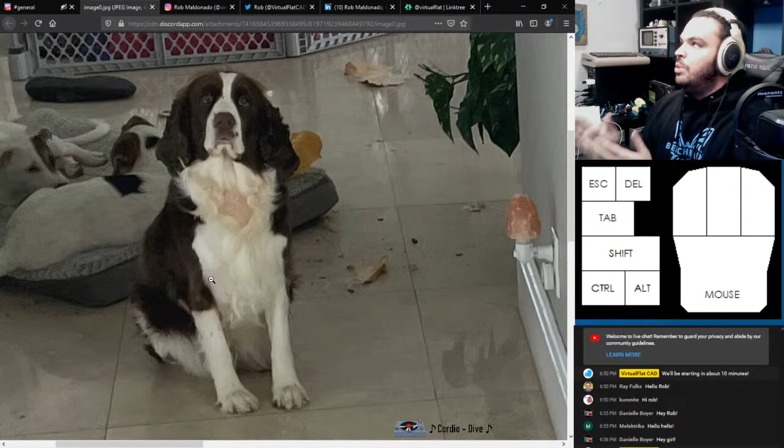But I walk out of my office and I see this. So the door was ajar, just like you saw there. And immediately, I see Stella, and look at Stella, she's looking at me like this. So immediately when you see a dog looking at you like this, sitting, there's something wrong already.

So Stella just with the face of, please, I tried to stop them but I couldn't, tried to, I guess she tried to talk the other puppies out of making that huge mess over there, but failed.

So apparently what happened is the puppies were outside. They broke in somehow, not really sure how that happened, maybe the door was just ajar or something like that. But these little puppies, I tell you, they brought in a pine cone, they brought in this pine cone and just demolished it.

So I just walk out of my office and I already have this little mess to clean up. But normally not much too much happens for these puppies, they just like to chill and do whatever. But some days you get the cute puppies, and other days you get the pine cone, and the pine cone crumbles.

So that was my little story over here, hope you enjoyed that. But other than that, what I got going on for you here, let's look up. So kind of related to the puppies is today's model of the day. Hey Yashwanth, what's going on?

So today's model of the day is this pet grooming table. The point of it being, you lower down the table to a height where your dog or whatever animal - if you have a cougar, sure, why not - can jump on the top of this, and there's a switch that actuates a linear actuator, which raises the height of this table.

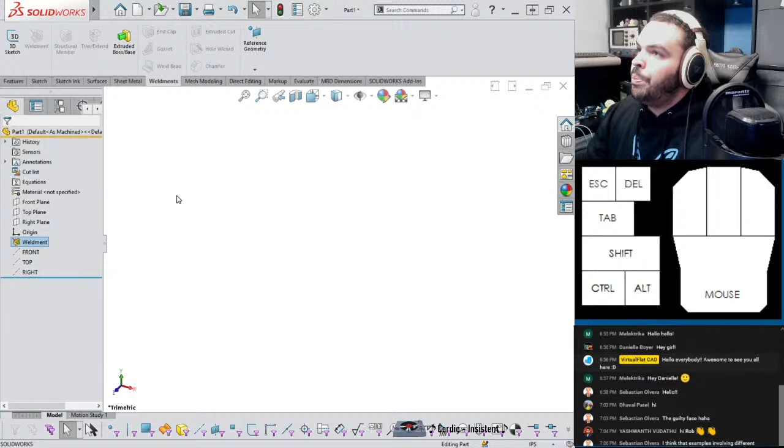All right, so let's see, do I do my profiles first or my layout? Let's do our layout first, because then I can demonstrate another thing.

So with my base, you can of course draw this thing with all the rectangles, the curves, the fillets and stuff like that. But boiled down, as simple as it goes, you're just drawing these overall paths for these weldments to go along. That's part of what makes working in the weldment package so simple.

So maybe we'll start like this, and like that. I'm gonna have to lock this sketch down, but overall this is our shape. If I go ahead and compare it to this doodad, yeah, it's like an H with 2 bars. So that's what we've got here.

Now I can begin defining my sketch just like I would any other. That's always the same. You did not attach to the things. Let's snap like that. Okay.

So this and this would like to be horizontal. Alright, so now we have something that moves like that.

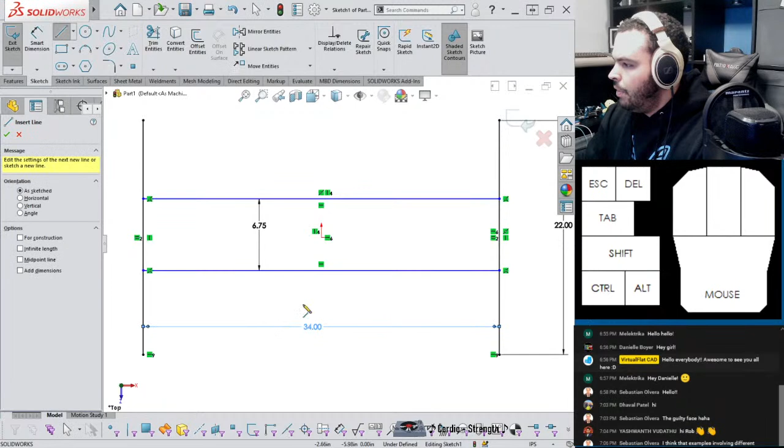So likewise, this gets 6 3/4. We're still underdefined, but I think I can take care of this with perhaps a center line.

Like that. And now what? Oh yeah, the midpoint of this and the origin need to be in the same place. Alright, so now we have our sketch fully defined.

Before I go any further, I will of course save. Saving is very important. It's always good to build up that habit, but it's also when SOLIDWORKS starts acting weird—it's almost like how a sailor just knows there's a storm coming. A CAD modeler just knows when SOLIDWORKS is starting to become unstable by how it's acting. It's not doing anything now, but this is just out of good habit.

This is a grooming table. Grooming table. And I'll just name it something simple. Groom base. There we go.

In regular modeling, you draw your sketches out and then go to your boss extrude or maybe your revolve. But in weldments, we have this main feature called structural members. Let me show you how it works.

Once you get a layout sketch here, the idea is that there are only so many off-the-shelf weldment profiles you can buy, right? You don't want to go out of your way to have some weird box shape. It's usually something very common, at least in the United States—1 inch by 1 inch, 1 inch by 2 inch, 2 inch by 3 inch.

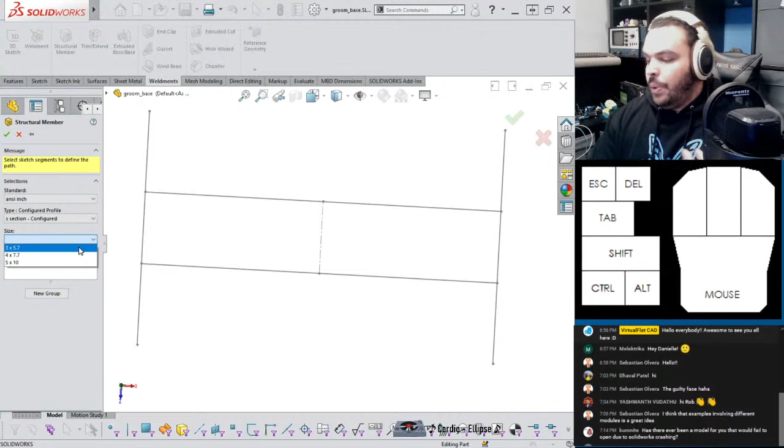Yeah, everyone has had that experience. I think that's especially true if you've been using SolidWorks for any period of time—it just happens eventually. Especially, I think the most unstable versions of SolidWorks actually happened pretty recently. In my opinion, when I was working in tech support, 2017 had a lot of bugs, 2016 had a lot of bugs, 2018 had bugs. And then they started to get focused and were like, oh, maybe we should add less features and work on stability and fixing bugs. And we were like, yes, they get it finally. So I think 2020 is very stable in my opinion. Not to say I've never had crashes on it, but the most recent versions of SolidWorks have been the stablest I've ever seen them. I've been using it since 2015. But yeah.

So I don't really see the profile I need. So let's go make a custom folder. First thing we need to know is where our file locations are. What you want to do is go to your options, go to where your file locations are. Here it is. And if we go here, there's actually places where you can show these are the folders that contain your weldment profiles.

No need to be sorry, kuronite. I take any question, and if it's quick to answer, I'll do that. But that's a deep rabbit hole, so it is what it is. So yeah, that is the standard location for my weldments profiles.

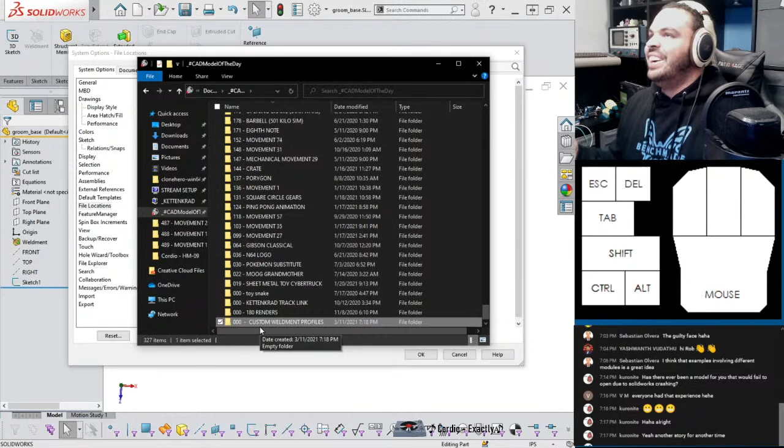2020 is very stable, Rob 2021. Yeah, and that should pop up with the crash reporter, where it says 'oh SolidWorks crashed, you want to send a report?' It should just have a picture of my face with that quote. Oh man, I'm sure that'll go over well to the people experiencing that.

All right, so we have our folder. Once we get that, we'll go ahead. I copied my file path and I just say add. I need to paste. Okay, so we're in the weldments profile folder there. So that's added, so I should hit OK. Would you like to make the following changes? Add this? Yes, that's why I did it. So let's go ahead and do that. Go back to structural member, and that's interesting, I kind of expected it to show up over here.

Let me go look at it for a second. So we do have all of these, right? Weldment profiles. Here, I will troubleshoot this for like 5 minutes tops. Okay, so we don't need templates, it's the profiles. It could be I just need to restart SolidWorks, so let me try that. Here we go.

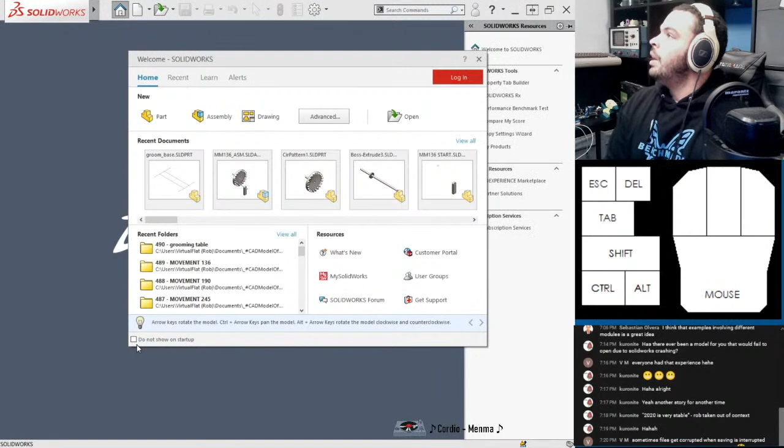VM chiming in: sometimes files get corrupted when saving is interrupted for some reason, happens more when working on a network. That's a great point, because the SolidWorks file structures are built pretty specifically. And of course, really with any file, if any part of it gets deleted, that causes stability problems a lot of the time. Honestly, when I worked on tech support, if a customer was getting tons of corrupt files, first question: are you working over a network? That is literally number one. And if that's the case, it's like, well, your connection is probably not stable. I wouldn't say it like that - better customer service ways to say that.

Okay, still not showing up. Why you do this? Why you do this? But yeah, that could be a very common source for corrupt files. Yeah, if this doesn't add, I'll probably just go to the SOLIDWORKS standard one and show you the other way of doing it, because I do want to get on with our lives here.

So let's see, I think the easiest way, honestly, I'm gonna grab Search Everything and type in ANSI inch. Okay, why is the search like this? Details. Okay, so this is probably the folder. All right, let's take a look at this. Actually, I'll talk a second about what I just did there. It's very helpful to have this Search Everything app, I highly recommend it, it's free and it's like Windows search if it actually worked. What I like to do a lot is just, if I need to find any system file for SOLIDWORKS, I just type in the name and it gives me the path. It's great. So yeah, angle iron, C channel.

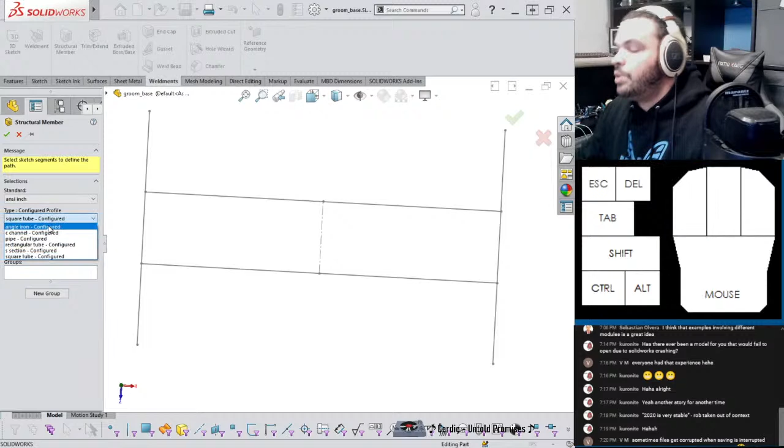So all of these were what appeared here. So angle iron is the first one. That's where it is. And now what we can go ahead and do, if I can find my folder - there we go.

Let's actually add a configuration to this rectangular tube. So you might be wondering, these aren't SOLIDWORKS parts, because a SOLIDWORKS part is SLDPRT, this one is SLDLFP. That is a library feature part, used by SOLIDWORKS for library features that you kind of drag and drop whenever you need. But you can edit these. So in order to do that, let me just minimize this - simplest way, drag and drop straight into SOLIDWORKS, and that will bring up the standard SOLIDWORKS library part for editing, and it's great.

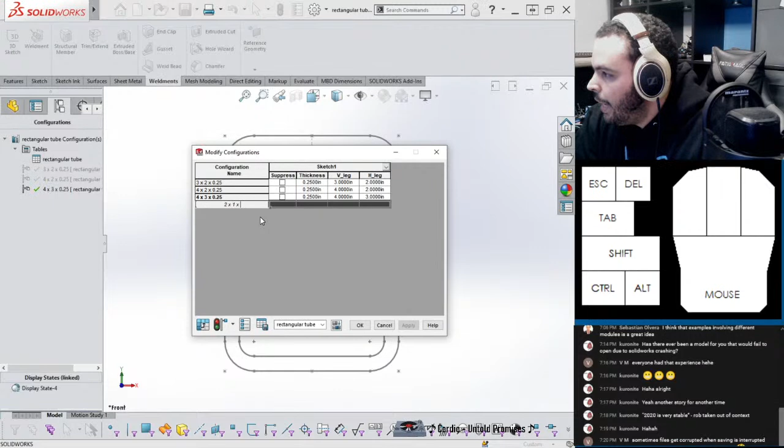So you can see here, configurations is actually what drives this whole thing. There's a table here - what's in new? So the table, if I double click, it should tell me its secrets. Okay, I think I'll do this from here. So I can go here and say, oh, this is great actually - it looks like it's the big dimension followed by the small. So this is a 2 by, to be consistent, by 1 by, and it's not going to be a quarter of an inch, like Christ, that's way too much - it's going to be a 1/16. And then I can just go here. Yeah, spill your secrets for me, little table.

So the V leg is 2, and the H leg is 1. Apply. Okay, so if I click on this, this should adjust.

Do you have to rebuild? No, oh no. Zero thickness geometry. Oh, this is probably too thick. There we go.

Yeah, let's do that. So what was happening there is that the values I put here, the fillet was way too big, so this line turned into 0 length, and that's why it was throwing a fit. So let's...

I might throw this in a different folder. You can live in there, and then I'll just drag and drop because of permissions. But let me give this a test before I do that.

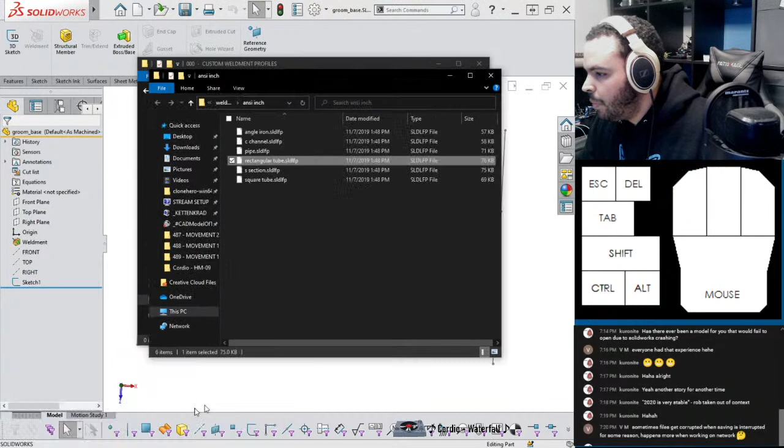And so one goes here, and I need to go back into my... this. So replace. Admin privileges - ooh scary, so scary you guys.

Alright, so what do we got here? ANSI inch, rectangular tube, and there's our new standard. So there's a 2x1. Alright, and now we get to see some actual solid geometry now.

Hooray. So the way you want to pick groups is by what SOLIDWORKS calls trim order. As you can imagine, these tubes have thickness to them, so you can't have a tube go all the way to the length of this and this because they intersect each other at this point. So the question is, who gets the spot?

The things you pick first get higher trim order, so higher priority. So the trim order of our thing here, if I go back to this doodad - yeah, you see at that corner, the weldments on the side get priority. The ones in the middle have secondary priority, so I should pick these ones first.

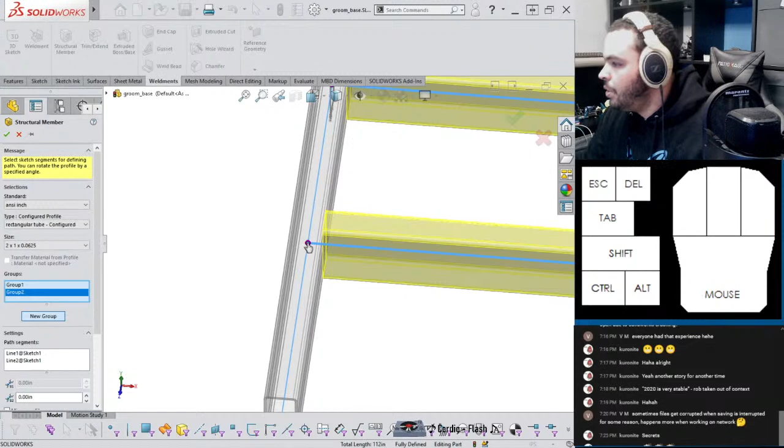You can adjust this on the go too. If you click the pink dot, you can adjust what happens to the corner treatment. It says group 1, trim order 1. If I set this to trim order 2, and this to 1, you can see the horizontal member has priority - it gets the pink dot, and it just breaks this thing into 2.

So it's really pretty powerful if you plan ahead of time. If you plan ahead of time, it works out pretty well.

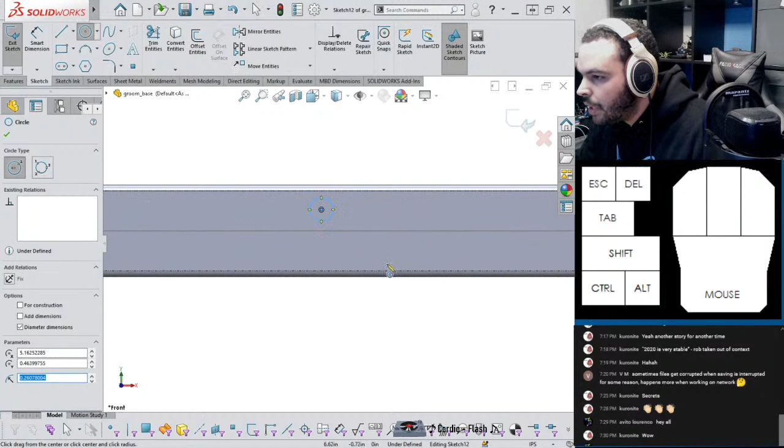Currently stuck on cut lists. Oh, we can totally review that, man. Yeah, they can be kind of tricky sometimes.

It says 0.75, and that measurement is to this edge - that's how I measured it. And that is 20.5, and that should fully define it. Then I could just say extrude cut through all both ways. So regular features still work on a weldment part.

And I think that'll be it for this - I'm not going to go too crazy because I've already spent a little bit of time talking about weldment profiles. Oh, Sebastian asked an awesome question, and this I can demonstrate.

How do you change the orientation of the structures? He's talking about - correct me if I misunderstood - these just kind of knew they were vertical, right? So what if you want them horizontal? I'll tell you what you do: you go back into your weldment feature here, scroll down, and there's actually a box where you can specify a rotation. So if I set group 1 to be 90, and group 2 to also be 90, then hit OK, now they're flat. So that's how you do that.

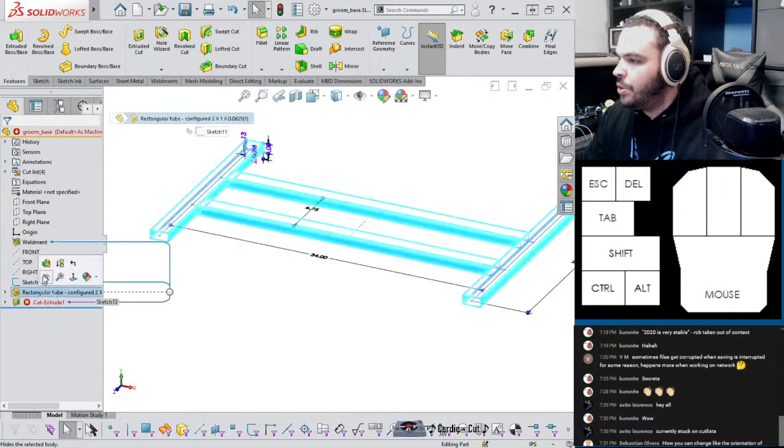And additionally, if you press locate profile, it'll zoom you into the profile. Remember how I said I like to draw the center lines of where the profile is going? Well, if this was like the top corner, you can just click here and it scoots up to the top corner just like that.

There's a lot of nuance you can have with your weldments here. Let me put these back. So 0, group 2, 0. Cut extrude should come back here, and we should be all good.

Vito, how would you say is the best way to keep in touch with all the elements of SolidWorks? I feel like I go through cycles in terms of proficiency. Surfacing is alien stuff to me.

I always say the best way is practice. I've said that tons of times, but honestly what you're doing right now is really going to be good for you. I also like this particular thing to model today to keep my skills sharp, because it's kind of the opposite for me where I really like to do everything with surfacing, but weldments and sheet metal don't get a lot of attention from me typically.

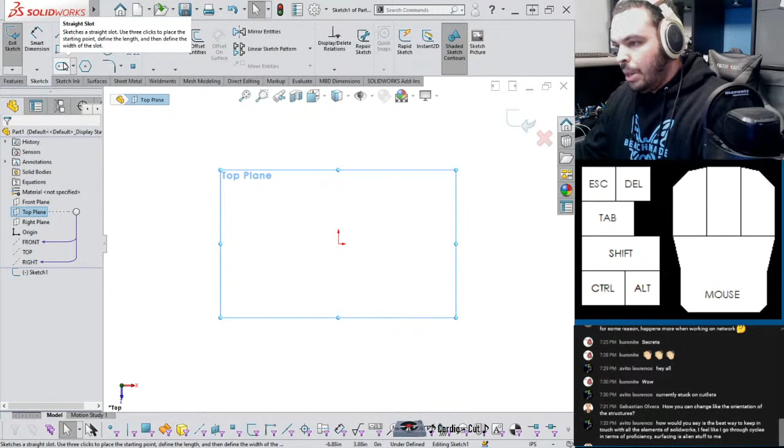All right, so this is pretty good. We need a new part now. So I'm doing bottom-up assembly modeling, and I think I'll do this with sheet metal. So I'm going to grab the top plane, and this sheet metal box will probably have... yeah, it's like a... I don't know if you can see that.

Here, let me change my little scene there. It's a sheet metal box. It has some features on it. And there's my very, very crummy drawing. So it's like a box with three of the sides missing.

So what I'm going to do, make sure I change it back. There we go. Let's get a center rectangle like this, and then just turn this into construction. Boom, there you go, that's the shape. Don't forget, you have tons of sketch entities, and a lot of them are very close to what you need, so be sure not to count them out. Like I could have drawn these three lines one at a time, but this basically had it for me.

All right, so that wants to be 6. Eventually this will get another configuration, but I'll worry about that when the time comes. 7.75, we go to sheet metal. So here's where the fun begins. Base flange or tab, so sheet metal, and the main thing there is base flange.

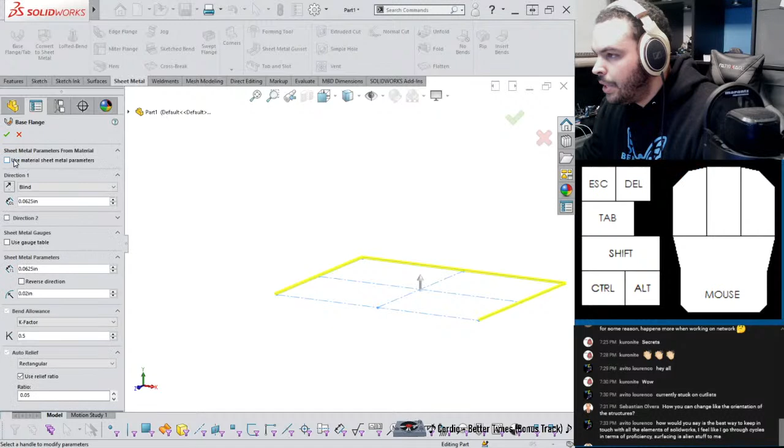So what I'll do here, you can set the thickness, but let's see. Oh yeah, I don't have a material applied. Use gauge table, that's what I was looking for. SolidWorks comes with a bunch of gauge tables. Let's use the sample table for steel, because that thing is pretty rusty, so I'm very sure it is steel.

Vito, what do you got? When the time for assembly comes, maybe touch on how to use the new part option from within assembly. I find it hard to navigate to get my plane and setting the origin, and end up just making it normally. Oh, I'm glad you brought that up, because now I can actually show you how to do that when we make one of these last parts here. So I'll do that later.

Awesome suggestion though. The overall height of this is 14. So there's our sheet metal thingy. Okay, and in this, there is a boss that supports the axle that goes through.

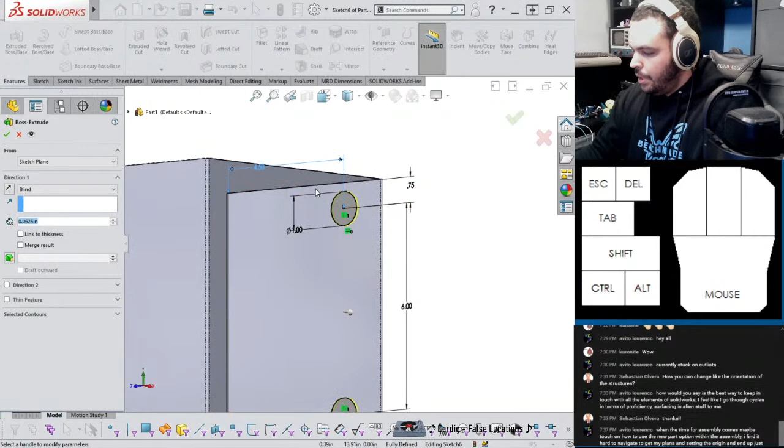So I can not merge. Oh, I didn't measure their thickness, but I'm just going to guess they're 1/2 inch. Okay, so we'll get that mirror. Okay.

So far, so good. And now, I think I'm going to borrow these same sketches. Let's get on the right plane here. Oops, can you... oh, alright. Yeah, I think that's a bug.

Stable version, guys. Yeah, because that's happened to me like in every single stream when I try and put a circle on a center point.

Random question: when you're dimensioning something, the pop-up window where you enter the value is wider than usual. Is there any way to have it like that permanently? Honestly, that's a good question. Oh yeah, I didn't really even notice. I wonder if I put it shorter, just... It might just have memory, honestly.

Here, let's put it ridiculously long like that, and let's just see if it appears in the future parts that I model. Let's do that test, because the answer to that I'm not sure, but I think it has memory.

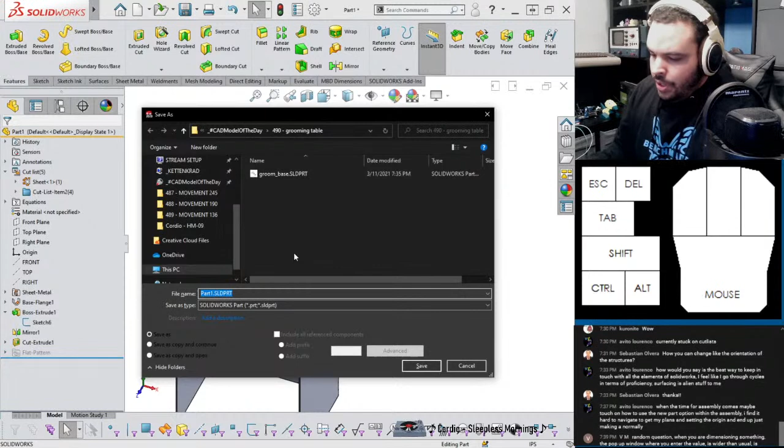Okay, so I'm just gonna call this groom box. And let's get, so let me rename this configuration. Go to properties. So this is the dimensions of the one that is at the towards the bottom. That is to say, it is this box here, and I'm probably gonna neglect this cut here. You know, it doesn't really add anything to the design.

But we'll add a new configuration called top, and I should be able to click this, double click that with our really long box, and the value of this is supposed to be 9, but be careful, don't hit that check just yet if you're doing configurations. Hold it, partner. You go over here and make sure you set the scope to just this configuration. This trips up tons of people. Now you hit OK, and it's always good to run a little test.

So bottom, nothing changed. Top, there we go. So you can see the top one is just a bit wider than the bottom. And that rebuilds just as expected. There we go. All right, onwards and upwards.

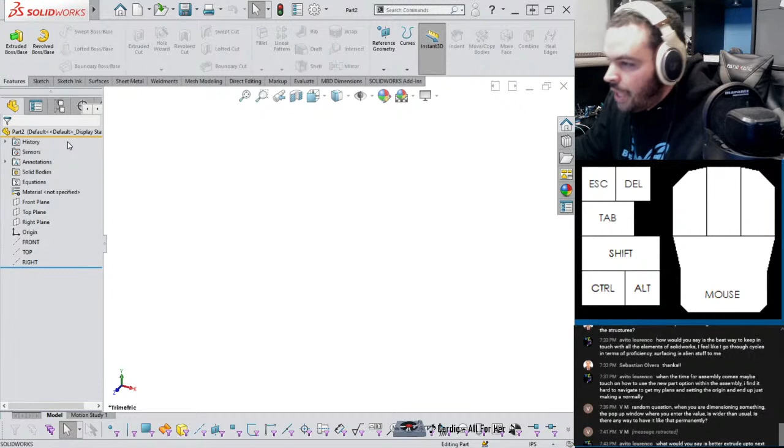Vito saying, what would you say is the better extrude option? Up to next versus up to surface? The end surface is the same. Pros and cons. That's another great question here. Let me see if I can try and work that into this next one here. Let me see, let me think. All right, how about I start modeling it, and then if I see a good opportunity, I will strike and answer your question.

So this next component is going to be the actual linkages. It's this. So this, just like the boxes, will have configurations because one of them, you know, you can see does not have a hole, has a recess, but no hole. And then this one has a through hole in which the linear actuator actually is able to put its linkage through. It's a plunger through, for lack of a better term. I know there's a word for it, but I literally can't think of it.

All right, I think I'll do this kind of similar to how I did the other one. So again, it is like a box with a couple of these removed, but they also have these little tabs, so I'll just draw these out like that. And it's okay to have lines on top of each other like that, as long as this one is a construction line and not like a solid line.

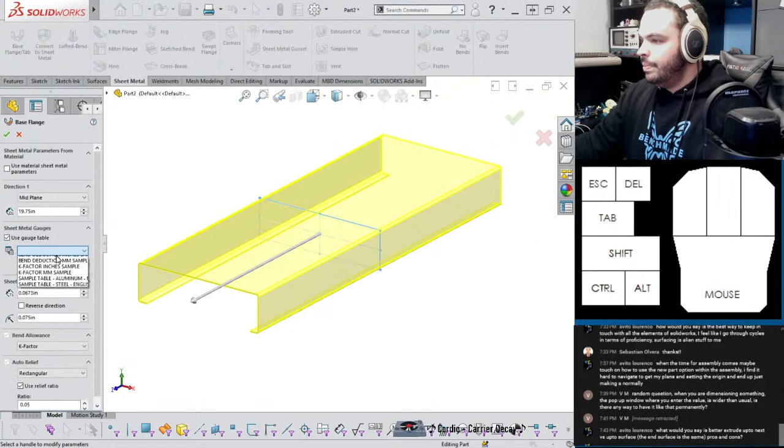Now we're getting somewhere. Again, it'll be a sheet metal part with an overall length of 19 3/4. We can use our gauge table, sample table, and we'll be consistent and say it is 15 gauge.

Also very cool about the sheet metal, notice that I can draw these with perfectly sharp corners, and it'll put the radii on there for you. Very cool, you can set the option for that, like here.

I might need a flange to box off the ends. Let's do this. Yeah, I'm gonna need an edge flange, so from here to here.

Let me see if I can, well, no, there's nothing. There's like end conditions for this feature too, but nothing particularly interesting. Okay.

I know I don't want to spend too much time on this, but can we have a relief, please? Can I see the relief? There we go.

Let's try that. I might have to trim, what's it called, trim side bends. That's the option that needs to be on. That should prevent this weirdness from happening. There we go, that's more like it.

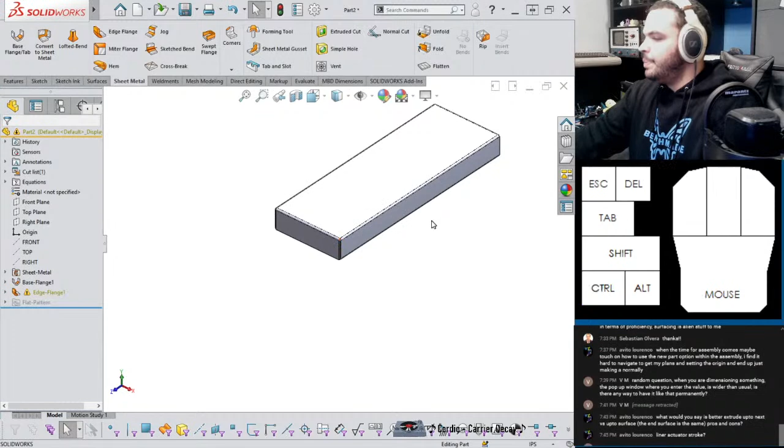So this will be Groom. Oh, that's all caps now. Deal with it. Groom link. Not trying to overthink it with the names, you know.

Okay, now I want the holes, and it has a, what is your problem? Part intersects itself after bend operations. Still? I'll try one more thing, but if it just keeps being angry, I'll probably just move on. Bend towards the outside. Okay, that fixed it.

All right, we made the part slightly longer, and that's totally cool with me, because the critical dimension is where the links actually, where the pins actually are, you know? So in this, we will have first some standoffs.

And drawing circles like a drunk man. Equal. Might even just connect them with a center line. Midpoint with the origin. And then the distance is 18. And this is the one that matters.

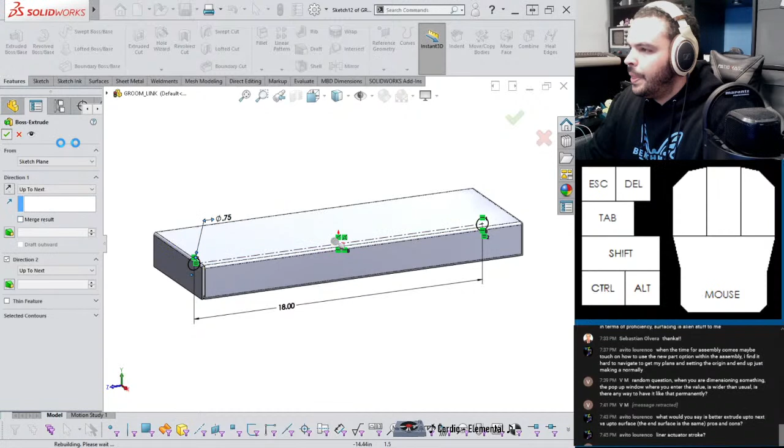And I'm thinking about that other question that I got, but I don't think this is still a great example, so I'll move on. I'll probably make up a quick example at the end.

Okay, and then we need the holes now. So, okay, so these circles are just fine. Equal, 0.5, and extrude cut through all, both.

And there's our link. So we need two variants of this. One of them, I'm going to call connected, because that's where the actuator connects to.

Yeah, ooh, not derived, I need to rename. Can I rename from here? No, properties. So I'm just going to call it connected, add. And then one is through hole.

Alright, so I'm going to do the through hole first because that's just one feature and I can just suppress that. Actually, yeah, this is a through hole configuration.

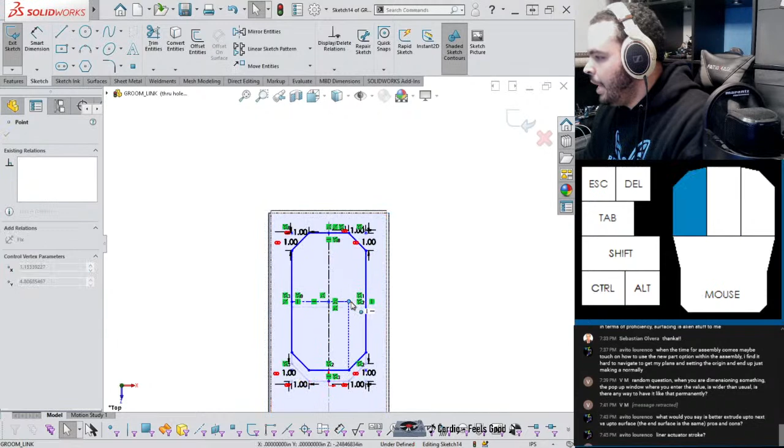Yeah, I thought I would just use sketch chamfers rather than feature chamfers just to make it so I don't have to select these tiny edges, you know. Alright, fine, be that way. It was your turn in the spotlight, sketch chamfer, but you're being annoying, so I had to cut you.

I'll just add them in the features, no biggie. 5.25. Okay.

So this too, oh, this is gonna be a little tough. Well, it's not too critical because this hole's gaping, so it's not like it's a tight fit or anything. So if I get it off by a thickness or something, it'll be fine. Extruded cut through all. You're going the wrong way, son.

Go the other way. I might be able to use the break corner. So if I go to sheet metal, go to corners, no, not corner relief, break corner. Can I break? I can't break internal corners, can I? No, I guess it's only external.

So if I click on this, you see it's breaking them with a chamfer. So I think I'm just gonna have to use a regular chamfer. All right, wait, I got a cool trick to show you guys.

Yeah, I'll show you something pretty cool here. And before I do that, let me answer Avito's question.

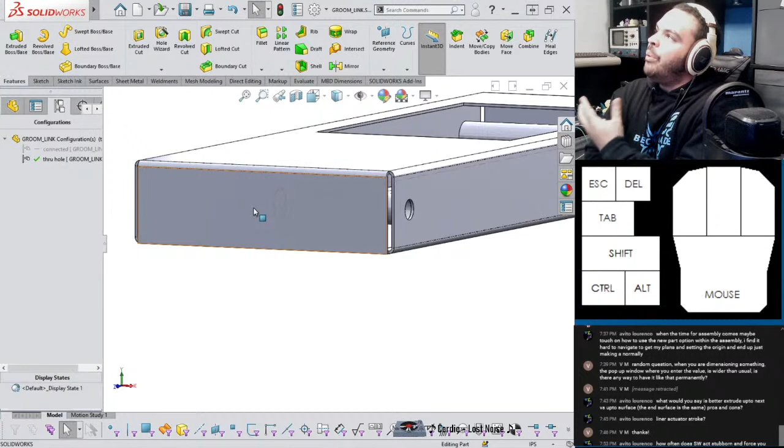How often does SolidWorks act stubborn and force you to school it by going an alternative route? I love that question. I would say practically every part. There's something like, there's a way I want to do it, and I have to just use the alternative route. Not necessarily a bad thing, because some of it's like, oh, instead of doing it in one step, it's two steps. So most of the time it's not a big deal. It's not like I hit a brick wall and I can't continue anymore. But I'd say almost every time.

Man. Sometimes I can't fault it because it's just such a huge and complex program.

All right, so back to my super cool tip that I bet you've never heard before. I want to add chamfers to this. I've decided, but well, not yet. If I go to chamfer, I have to go and painstakingly pick each one of them. Let me do that again, just to show you. If you click on it, it shows you the preview, and that's it.

Fillet, on the other hand, is a little different. So let me go to fillet instead. And if I click this one, you get this kind of super duper edge selector. It's awesome. Let me zoom out and show you what I mean, enough that I can still pick it, but then you see the effect.

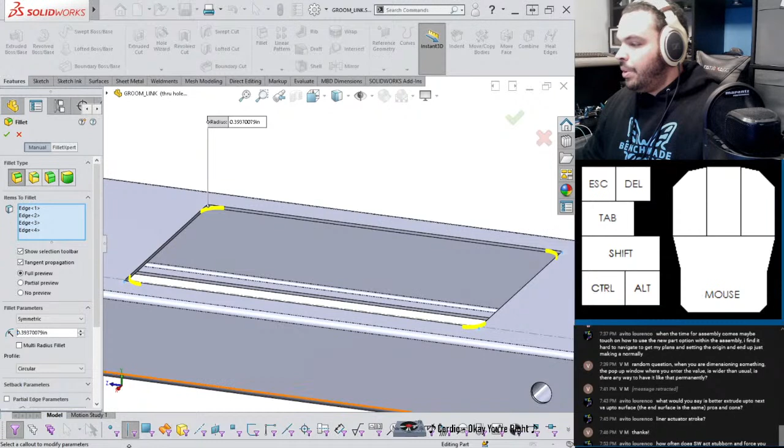Very powerful. For some reason, chamfer does not have this little selection toolbar. Only the fillet does. So how is this helpful if I want a chamfer at the end? Well, I'm going to apply a fillet anyway, like this, and then go back, right click on fillet, and say convert fillet to chamfer.

I probably should change the size of it. I don't think I ever specified its original size, but there you go. So that is both how to use the selection toolbar of fillet and how to convert a fillet into a chamfer. If you knew this already, let me know, because I came up with this a while ago, and I don't get to demonstrate it very often. It's using the selection capabilities of fillet, but then you transform it into a chamfer afterwards.

So yeah, this is me schooling SolidWorks. You know, got to show it what's what.

So through hole, so connected. Yeah, we'll have that feature gone. So I'll go ahead, and let me see what I want to do here. How do I want to do this? Because I don't feel like creating a new plane. But I do need to add a little L bracket thingy. Alright, this is kind of the lazy way of doing it, but I'm here for it.

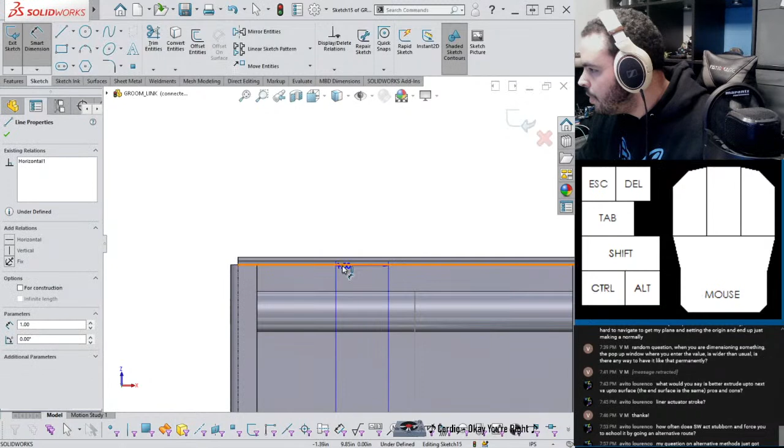So this is 1 inch long, 5 like that. Wow, I never gave this thing an overall height, which is fine, we'll deal with it. Grabbing this, that's 0.5, and then this is 12 inches from the end. Fully defined, and I'll just give that a height of 2.

Uncheck merge result. So this is where I want a bracket to be, where this block is. It's going to be this face and the face that is butting up against the inside of our little doodad. And so how does this help us?

Well, be aware that sheet metal actually has a convert to sheet metal function. Let me show you how that works here. So what you do is you select the bottom, what you want to consider your first flange. I'll do this one. And then you pick what edges you want to bend. So if I pick this, you can see it's kind of just wrapping around this cube. And you can keep going.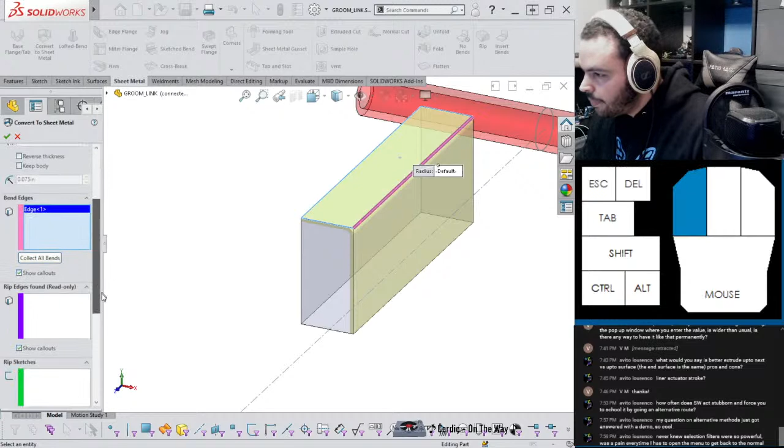And yeah, I don't think I need any particular options. And there we go. I got my bracket exactly where I needed it to go. Additionally, I should be able to just simply mirror it. Like that, there we go. And then I can punch a hole through that, and that's where our actuator will go through.

My question about an alternative method just got answered with a demo. So cool, I'm glad you're enjoying yourself here.

That was my little trademark when I taught official classes in SolidWorks. Honestly, me personally, I learn by example. So it's one thing to say, oh, Fillet has a selection manager. It's another thing to be in a situation, really absorb the problem, and then unwrap how that solution helps you with your CAD model. I think that is much more valuable than just me telling someone, hey, just use the selection manager and fillet. Call it a day.

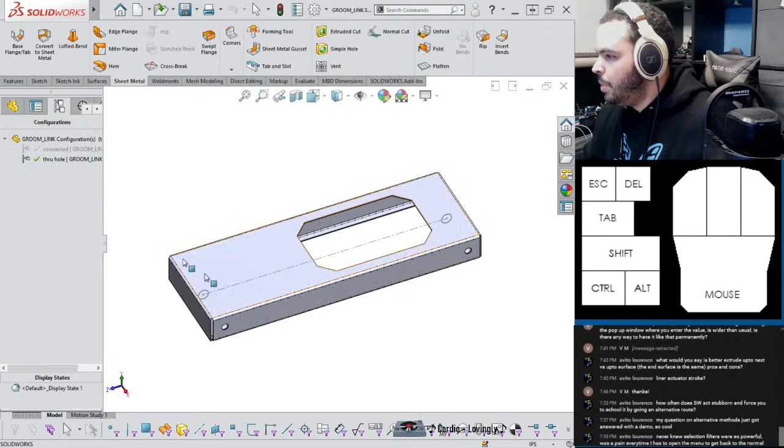Okay, and that should be the two linkages. So let's test - connected, and then the through hole should just be the hole with the others suppressed. Yep, this is working perfectly.

All right, what else, what else? We need a top, which I just realized is identical to the bottom. So let's get another - where are my windows? Go back to the base. I need a version of this that supports the top panel of, I guess, wood, and I'll just add a configuration. Not before renaming this. Bottom, add, top.

And I guess while I'm here, I'll answer - one of you mentioned you were working on cut lists, I'll touch briefly on that. Basically, in a weldment's part file, and also in sheet metal parts, SolidWorks will keep cut lists. It will make a list of every unique part in your weldment's file. And keyword unique here - you might ask why there's only 2 things showing up when there's clearly 4 members here. Well, 2 of them are identical, and the other 2 are identical to each other, so that's 2 unique ones. And with that, you can see all kinds of fun properties and info you can put into a SOLIDWORKS drawing.

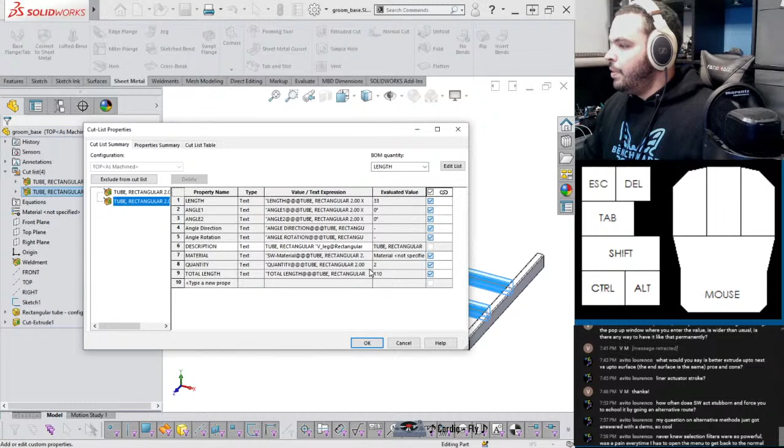Here we go. So the top, as far as I can tell, does not have such a hole. So I will suppress this.

Alright, so what I'll do is right click on sketch 1 and say configure feature, which will bring up this sketch. But it's only letting me suppress it, and I want to change the actual value. So let's try double clicking on sketch 1 - I can double click on each of these and change them in every configuration.

So for the top, the center to center distance is now 10. The overall length is still 34, but then this goes down to 20. Man, this is a great part if you want to take a tour of the weldments functionality and other stuff with configurations. Yep, so there's the bottom with the hole, and then top should change, and the hole goes away. That's done.

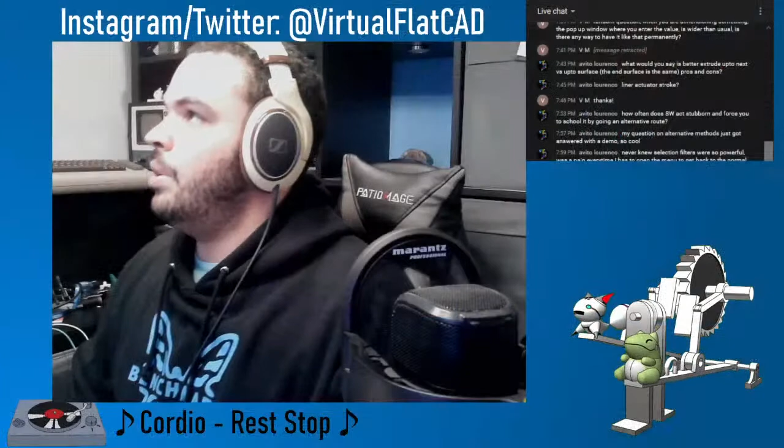So again, it's kind of like a C channel. If I may switch my webcam and look at this - look at this, this is my masterpiece. I know you're all jealous of my freehand skills.

It's totally not why I never was inspired to learn SolidWorks or anything like that. No siree. But I'm making like a C channel shaped thing, and to do that, remember, a C channel is like a box without one of the sides. There's your C channel.

2.5 and 1.5. And then from here I can just feed it to an extrude, and you might be confused because isn't this open? Well, if you feed an open sketch to the extrude, you get a thin feature, and that's exactly what we want to use here. So I want the thickness to go the other way, and you can actually auto-fillet the corners, although it doesn't give you a preview for some weird reason. Let's do 1/4 of an inch, and say mid-plane.

If I hit OK, there's our part. So why didn't I use a weldment feature with this?

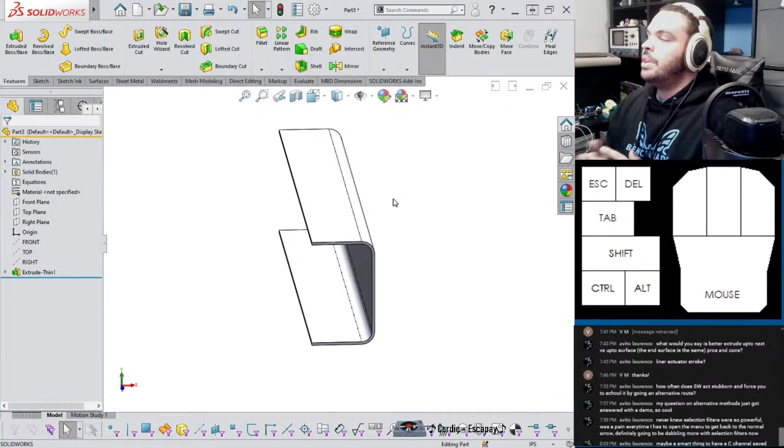That's the elephant in the room right now. I just stood on this soapbox for the past hour saying weldments is great, and now I'm actively ignoring it. Well, the answer is, if you don't need the fancy stuff - what you really use weldments for is when you need to trim, need to get cut lists and evaluate that information. There's more features, I won't go into that, but those are the two main benefits of using weldments. If you don't need any of that, a lot of the time, if it's just one piece like this, a thin extrude can take care of it most of the time.

Just gonna make that smaller. There we go. So it's just a matter of use case. C-channel.

Maybe a smart thing to have a C channel saved in your custom weldments profile. Absolutely. Additionally, I will show you this really quick.

I won't go through the whole process, but if you go into Design Library, this little dude here, go to - I believe - 3D Content Central. Where is this? No, it's SolidWorks content, excuse me. I remember now, SolidWorks weldments.

So you can actually download the full library. If you use weldments a lot, you see when I hover over, it says Control click to download the zip file. I can just throw that wherever I want, and it downloads a full huge library of weldments. There's probably a C channel in there. The reason they don't just give this to you is because it would make SolidWorks take even longer to install, if you can even believe that.

Everyone likes to talk about how long SolidWorks takes to install, like an entire hour sometimes. But the less data you have, the faster it installs. So weldments, that's a la carte, but it's completely free, and it just does it - you just drop it into your weldments folder, and it's all good to go.

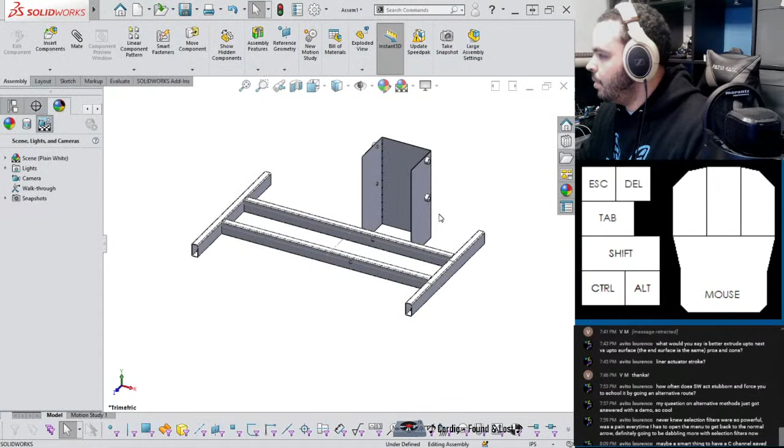What do I need? I need a groom box, the bottom one, like that. Because my brain is pea size, I already forgot what orientation it needs to go. Okay, so boss is to the outside, and I have this distance here. Come on, my dude. All right, so mate.

Want to know another cool trick? I need to mate the other underside, but I don't feel like just rotating it around. If you're in the mate tool and you hover over a face and hit the Alt key, watch what happens. It's very subtle, but it actually hid that face away, and you can actually select the bottom from the inside, if that makes any sense. It's a little nutty. A very cool trick.

From this groom box, I need... Oh god, nope, it's the right plane. There we go, the right plane of that. I'll do it with the right plane of the groom. Oh, drat. I guess with the front plane of that. Let's try again. There we go. That goes like that, and...

I have the value for this somewhere, I promise. Yeah, so from here to here. Yo, hit me up with that distance dimension, dog. There we go. Distance, 7.

And let's give this a place to live. Grooming table.

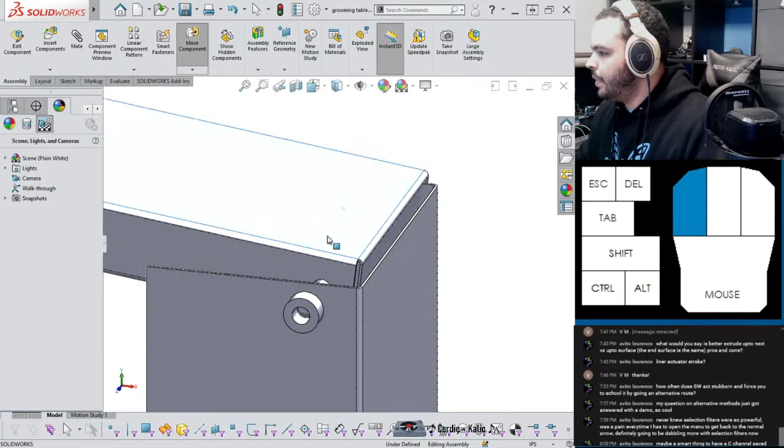Okay, so now I need links. So this is the connected, and I gotta be careful with the orientation of this one. Oops, yeah. So with this, I'll say concentric. Oh no. Alright, we're good.

And now I would like to center this along this pocket, basically. You could do that by measuring the distance, subtract the distance of this, divide by 2, yada yada yada. That's one thing. But you can use a width mate, and if you've never used it before, it's a great little tool.

So watch this. If you go to your mate, go to advanced mates, then go to width. You're going to select 2 sets of faces. One of them is going to be the width, which is the wide part, and then the tab, which is the narrow. We'll center the tab in the width. So the width, remember width means wide, so from here to here, and the tab is from here to here. And then you can see it centers it about there, and you know that is stuck in place.

Oh, you're about to join or host your first SolidWorks user group? Man, that's awesome. I've been super on the edge about that myself because I love user groups. When I lived in New Jersey, I would go present practically every month in a user group or something. But ever since I moved to South Florida, there was actually no user groups down here. Although the reseller down here, TriMech, has been trying to convince me to start my own and become the leader of that. But I feel that honor should go to someone a bit more responsible than I am.

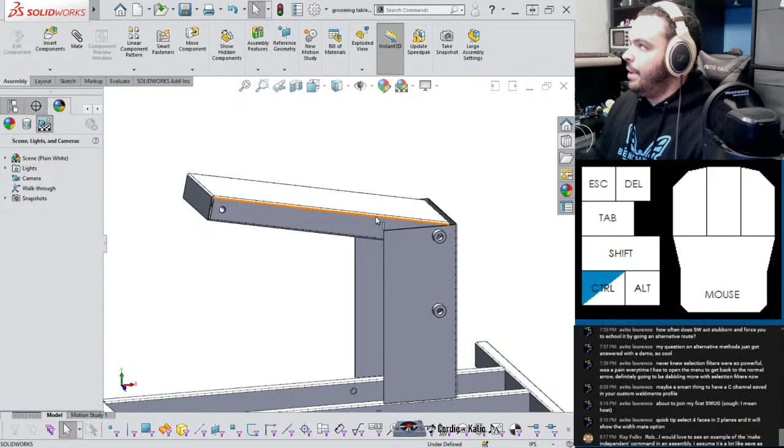Absolutely, my friend. Watch this. So that trick, by the way, if you hold down Control, take note on the right side of your screen on the stream, you can actually see what keys I'm holding down. So if you're not sure, you can rewind the video and see if I do any weird stuff or shortcuts. But yeah, if you hold down Control, click, and drag, you produce a copy of the part in an assembly. Very useful. Then I can click and say you need to be in the through-hole style. There we go. And rinse and repeat.

And now this might be a little tricky, but we can still do this. Using Avito's tip, select 1 face, hold down Control, select 2, select 3, rotate, hold down Control, select 4, and when I let go, width mate appears in the shortcut menu. So yeah, it lives there. It's great.

Ray chiming in, Rob, I would love to see an example of the make independent command in an assembly. I assume it's a lot like save as copy. I'll be honest with you guys, I have never used that command before.

Honestly, I might just look at it and play around with it and try to discover its secrets.

That's kind of one of the most important attitudes you can have when just being a CAD designer, not even only for SolidWorks, but for anything, or just in life. It's just like, never think you're done learning. I've taught hundreds of classes, hundreds of students. I've had my YouTube channel for 5 years. Just keep your ears open and you learn new stuff like that. I learn new stuff every day.

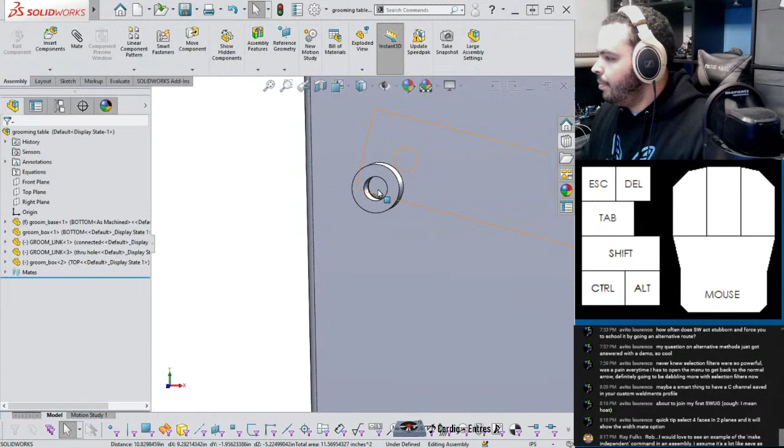Okay, so that with this.

What is the shortcut for collapse all or collapse current part in the browser? Breakthrough moment. Oh wait, so are you talking about this? Hang on, so let me just mess up my thing. Like that? Just to collapse everything? That is Shift and C.

C for collapse, Shift C. If you have a bunch of these things open, just pick any line item, Shift C, collapses it all down. What I do not know is if there's an inverse option, because sometimes I do want to expand pretty much everything. So as far as I know, there's no expand all. Not that I need to use it that often, but yeah, collapse all very useful.

You know, just cleans up your workspace very, very quick. Yeah, and looks like we'll need another width for this guy. And I think only one because we don't want it to be redundant.

So now, yes, this is correct. This is what I'm talking about. All right, this is looking great. This is awesome. Honestly, part of me wants to just kind of lock this so it stops moving. But...

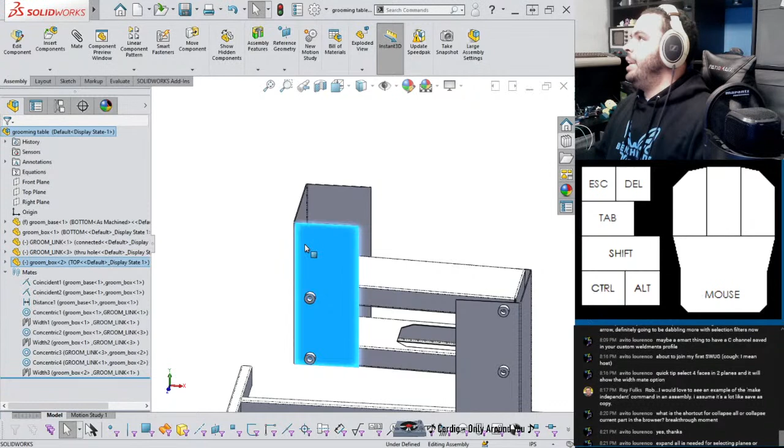Expand all is needed for selecting planes or something when mating. I agree, that's probably my use case as well. So yeah, I always like to figure out the stuff that I want to tell the enhancement team.

Just like these little things. It's like, come on, man. I'm not a software engineer, but this has got to be like one line of code. It's just something you're kind of doing already. You have a collapse all. Can I just have the opposite? Can I have expand all, please?

And I think I already tried this before. Yeah, it's not Shift E. Yeah, that doesn't do anything. It did bring me to my equation folder, which is interesting. Yeah, I don't know if that really did anything. But yeah, as far as I know, that does not exist.

Let's grab a copy of this and change this to top. Alrighty then. So I'm gonna get this thickness face with this.

If I will play around with it and see what it does. Oh, make independent. That's save components with new name. Do you want to save and replace the selected components with a new name?

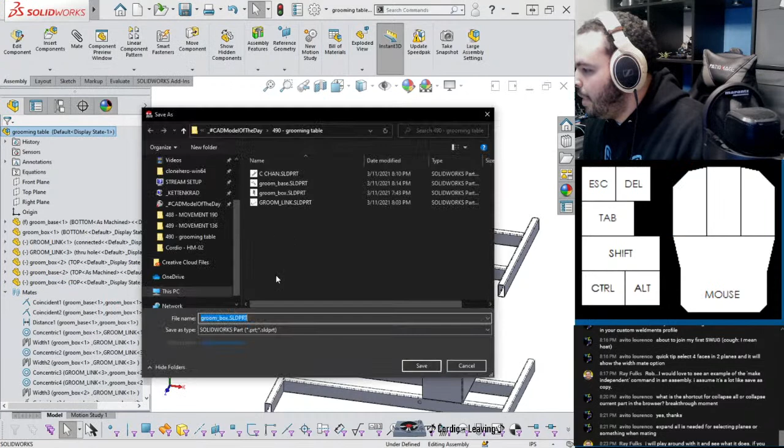Groombox 2? Question mark? That is really interesting. So it saves it as a new part.

Oh bro, I just figured it out. I think I figured it out here. Let me get my neurons in a line and I will tell you why I think that exists.

So, for example, man, I actually could have used this. We're taking a detour, hang on. I need to know, I really need to know. Let's go to my Instagram. Alright, and there was a model the day where I think I could have used that.

We're taking a little break here. Sir, I am looking for the bellows that I did. Yes, this one, 453. Yeah, basically an alternative to configurations, but there's something that would force the use of this. So let me look at what CAD Model of the Day this. So this was 254. I should have that. Open. Let's go all the way down to 254.

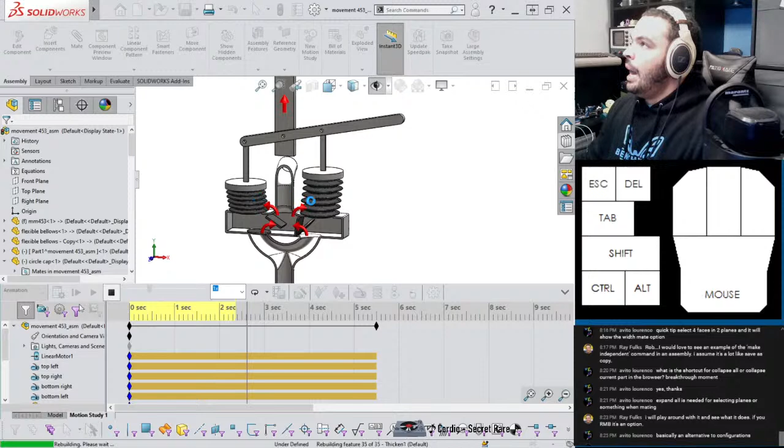So that was not trivial to do. And the reason I say that is because this mode of motion study with flexible parts depends on rebuilding the part over and over again. So I pose this rhetorical question: if this is in its own part file and it's rebuilding to currently look like this, squished, how is this rebuilding to look a different way at the exact same time? And the answer is you can't. You need an entirely different copy of this bellows to be in a different rebuild state.

So the way I made this animation is there's two copies of those bellows and they rebuild independently of each other. And that's what gives this thing its motion. All right, you are taking a long time to rebuild. I guess, let's see if I hit the good old stop. See if it wants to stop.

But you see in the tree here, I have flexible bellows 1 and flexible bellows dash copy. I made the copy manually. But it would have been really cool and actually faster if I just copied it, right click, made independent, and then I have basically an independent copy. Because if you consider its rebuild state right now and open it, you see it's expanded right now. But if I go to this guy, squish. They can't be both at the same time.

So, Ray, you taught me something here. I hope that makes sense to you guys. Maybe at a different time I'll go through an actual example with that. But that's a place where I could have used that. Make independent, I tell you. Yeah, I could have copied and just said make independent.

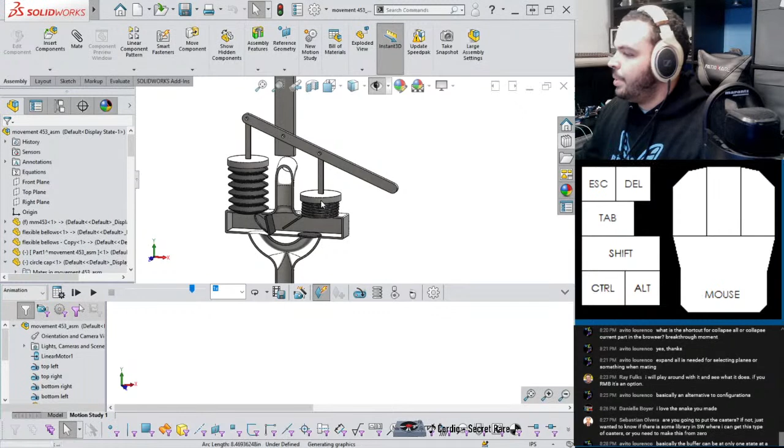Avito's basically saying the buffer can only be at one state at a time, pretty much. Yeah, because I have basically sketches that stretch and shrink based on where the assembly has moved, and you can only rebuild to be one shape at any given frame. And maybe I'll show you - just this one takes so long to rebuild. Maybe in a different assembly.

Don't save. Yeah, let's get back to our other doodad though. As you see, I am very easily distracted, but honestly, it can be a good thing sometimes. All right, so front with front. There we go. And of course, we just have this offset.

Yep, Ray chiming in: I think it's a form of save as, copy, and replace in one command. Precisely. Because I did what you just described there in the bellows example. I just did save as, copy, did all those steps, brought it in, but it would have been so much easier: copy, right click, make the one independent. Good to go. It's very slick. You learn something new every day.

All right, so I am missing one more dimension here. 8 is the number. So from here to here, distance 8. All right, so we'll give that a good old save.

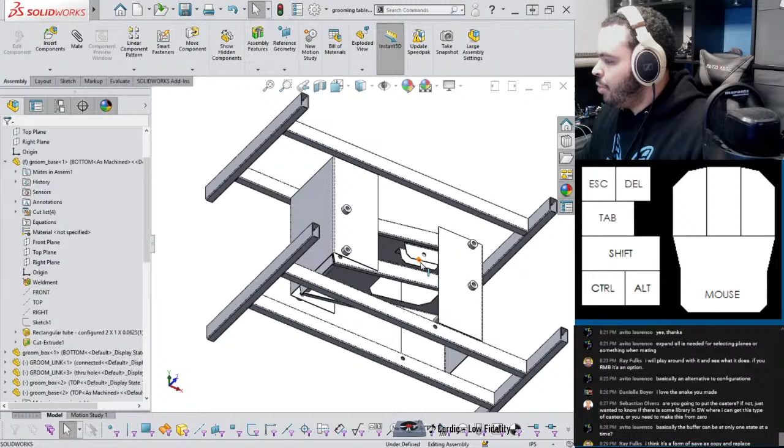We're basically almost ready. I might draw something real - I don't want to go too crazy with the actuator because this is going on so long already. I might just draw like a bottle jack and just have that, oh, there's our actuator. It'll do the same thing though.

But to answer a question I got previously, how do you use the new part command from within assembly? So if you don't know what he's talking about, if you go to insert components but you hit the drop down arrow here, you get the regular insert components, but you also get new part.

And this is the foundation of using the top-down assembly modeling technique, where you can basically draw parts that are on top of one another, or that can even change with how the other parts change positions. Just like the bellows, that when one arm goes up, it stretches. So you can do that all with this.

So new parts, I'll show you. So I'm going to click on new part. Everything turns gray. I haven't clicked anything yet. Look at how my cursor looks like right now. It's just standing there menacingly with a check mark. What do you mean, cursor, when you mean check mark? And it's understandable to be stuck here.

So what it's asking you to do now is to pick where the starting plane is. Where do you want to draw your first sketch? So in our case, we're drawing the tabletop with the wood table, right? So a good place that I would like to draw is maybe starting on top of one of these beams.

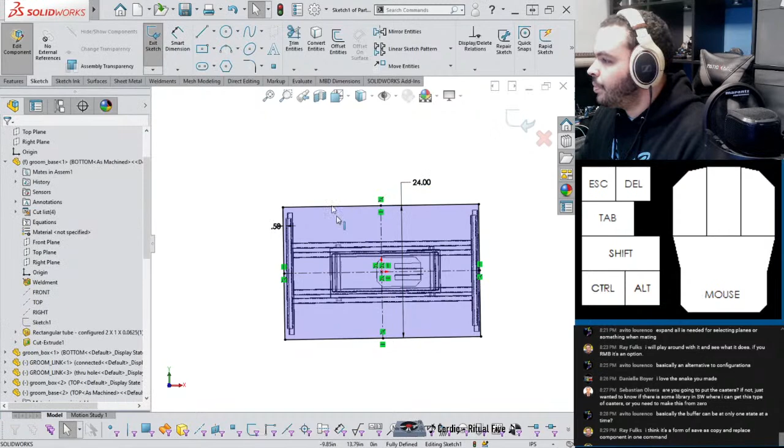Extrude. Yep. And say, oh, I wanted to fillet. So again, using our selection, I'll grab one edge and say connect it to start face. Grabs the others. And we'll bump that to maybe 2 inches.

So you have something like that, maybe just to make it a little bit softer. Not that small. Just do an eighth.

And I can exit, and that's it. And so what happens when I start moving this thing around? This is important. Let's check.

Oh, it follows. But surely I must be able to just yank this off, right? Nope, it's on there. How does it know? Well, a side effect from creating what is now a virtual part is that the face that you selected gets

this in-place mate. So if you want to adjust where the table is, maybe you want it to for some reason be hanging off the edge, you can actually suppress this and start moving it around, but you got to be careful.

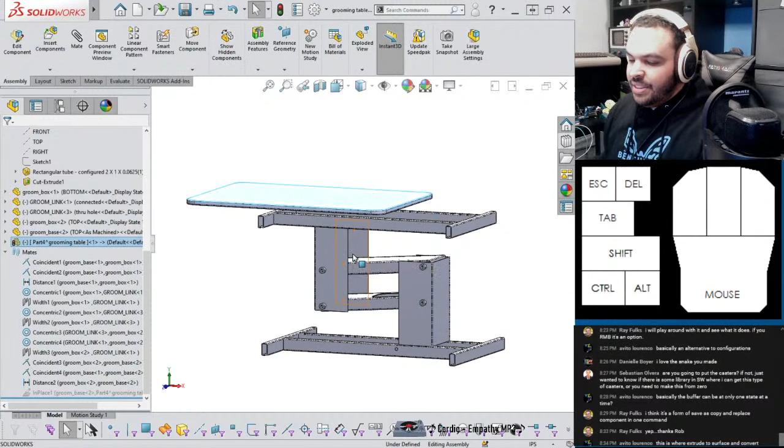Oh gosh, why is it doing that? And conversely, if you drag it out this way and rebuild, why is it so long? So this is the double-edged sword you have to consider when doing top-down assembly modeling.

I don't think this can be reversed. Oh yeah, it can. It can be reversed. Okay, so the save was just because I was being scared. So what the heck, I guess is your question right now.

You have to keep in mind that the way I defined this part is, if you recall, if I edit this sketch, it's always half an inch from the one edge. No matter if it's centered or if it's all the way over here, it's going to stretch that line and make this statement true. And that's the important thing.

So what if you wanted just to do it this way to get the length, but then wanted to move it around? Can't I have both? Well, sure, there's a handful of ways to do that.

I'll show you one. And before I do that, let me actually name this, because you can actually see this is at part 4 caret grooming table. So I haven't named it, so that's why it's part 4. And grooming table meaning that this actually doesn't have its own file. So we'll fix both of those issues.

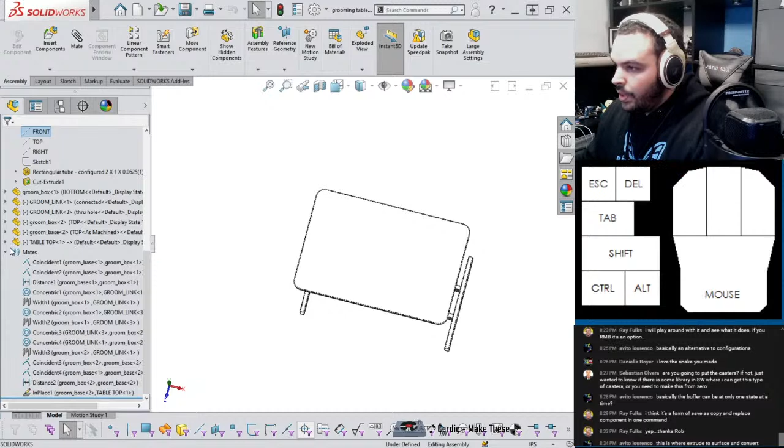But yeah, it's good practice to actually save this out. So you right click and save part in external file is what you want. So same as path, okay. And now it's saved. Now it's saved the tabletop out in its own file.

But now let's go back to our hypothetical. If I suppress this and start moving this around, you'll still get all sorts of weird behavior like this. And that's because, by taking that dimension from one edge to a different part in assembly, we created what's called an external reference.

So what can we do? We can actually delete the external reference just straight up. Just go into the sketch, delete 0.5, and just give it an overall dimension. That will fix it. But an alternative method is, first we'll put this back. You can actually open up this part in its own window like this.

There it is. And here, boss extrude, notice that it has a tiny little arrow. Arrow means external reference. And right now, it's actually watching the assembly to look for changes.

You can stop that by right-clicking on the feature, going to External References, and you get two options: Lock All or Break All. Both will do the same thing, but the difference is Lock All is reversible, Break All is permanent. If you break the reference, there's no way to reattach it unless you go back into the sketch and do it yourself. So I can't think of a single case where I'd recommend Break All. What I like to do is Lock All.

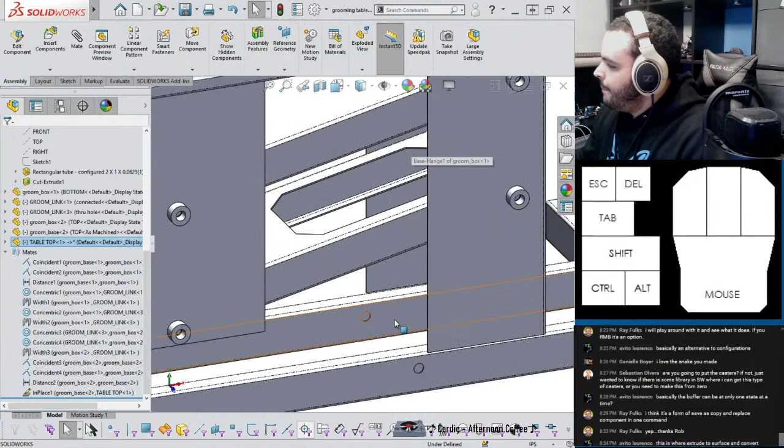So now, how do I want to do this? Yeah, I might make this a little different from the OG one. Let me see if I can pull up the picture back here. Yeah, you can kind of see it there, but I think there's like a ball screw motor that interfaces with a hinge there. But I think I'll probably take my own direction on this.

Part of me wants to do another in-context part.

Avito, do you need to open the part though? I think you can gain access via the browser menu. Yeah, oh yes, that's correct. Absolutely, if you open up tabletop you can go to external references here.

Good point. Yeah, it's just a lot of the times I like showing the part environment itself. It's a lot more comfortable for people.

Let me adjust myself, see my... I actually got this sweater new, I really enjoy it. My Benchmade butterfly sweater.

All right, yeah, actually, I might just let me pull a dimension from here so I know. Yes, so I can probably make that 7.5-inch plate with like a kind of bottle jack looking thing. I'll take my liberties with this.

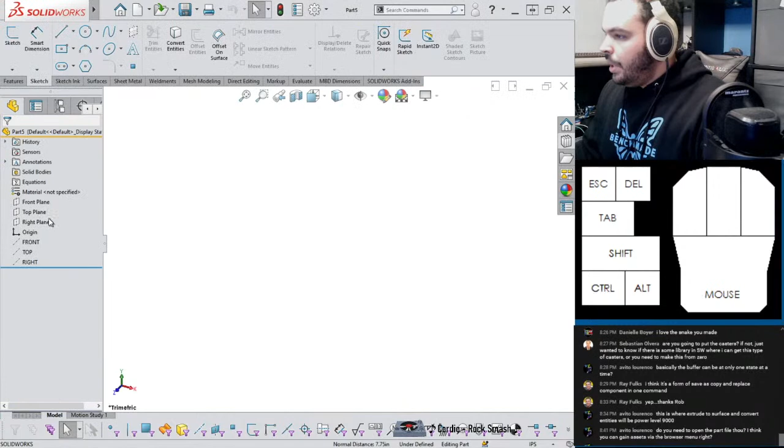Yeah, because we're going on 2 hours of streaming now, which is more than I typically allot to CAD modeling for the day. But you know, I'm also streaming, I'm also hanging out with my friends, so that time it's all rolled into one. It's good value time.

Might even make this a multi-body part. So we'll start with this and get a thin little extrusion like that. And then on the top plane, maybe do something like that. And make that a construction, make that infinite length, and then I can just start making stuff up. I'm designing, baby.

1.5. And this, let's see how this goes. We want a revolve, but don't merge. And let's smooth this boy out, smooth like my brain. Okay, do something like that. There's a kind of bottle looking thing. And then I'm gonna need like a little piston.

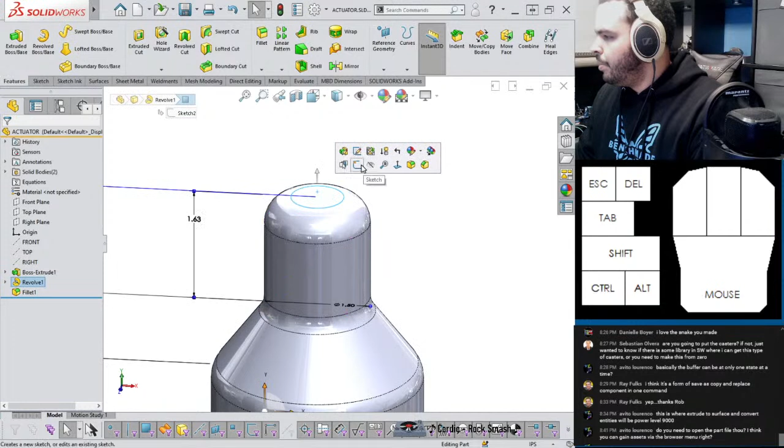Actually, I can probably punch the hole in first. How big is this? Let's just do it like that.

I think here, so going back to the question of what is better, up to next or up to surface. The way I would answer that is if both result in the same thing, I prefer up to next. The reason is because that's kind of an intrinsic end condition, you don't have to select anything to make it work. Whereas up to surface, you must select a surface for the end condition to work. It's one more thing that can error out - if you lose that surface because you filleted it away or something, that's more errors you have to fix. Whereas up to next, it'll just keep going till it gets to the other side.

Where it's different is up to next only means one thing. Up to surface is much more flexible. So if I go ahead and extrude cut this and select up to next, it only refers to one thing. It just keeps going until it punches out the other side of the body it's affecting. It will not cut through the plate.

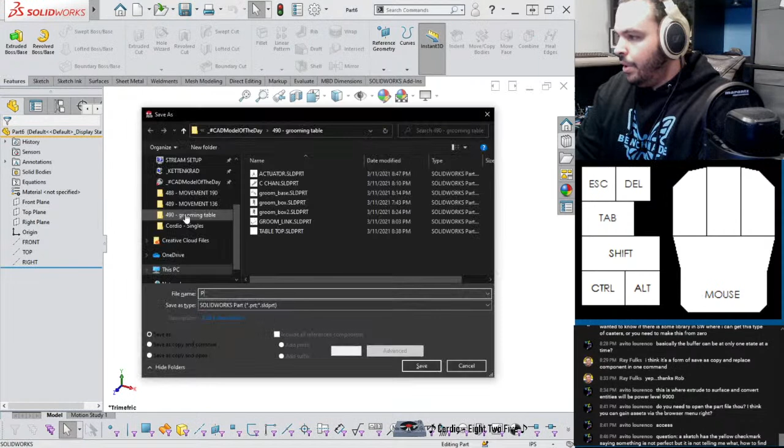Well, let's start a new part, save and call this the piston. How do I want to do this? Because it's going to be relatively on the simple side. Let's try, we're going to make a ring, I'm going to revolve this. So how can I do this? Let's just take it one step at a time. Let's force my sketch. Now, let me get more interesting stuff in here though. Let's force my sketch to be yellow and then discuss what kinds of things we can do with it.

So maybe make that 1.5, ooh this is thick. Make this 0.5, and make this 1, and make that way less, say 0.75. Okay, and let's say, whoops, I made this coincident. And you get the ketchup and mustard. In this example, admittedly, it is on the simpler side, so you might be able to fix it by just looking at it.

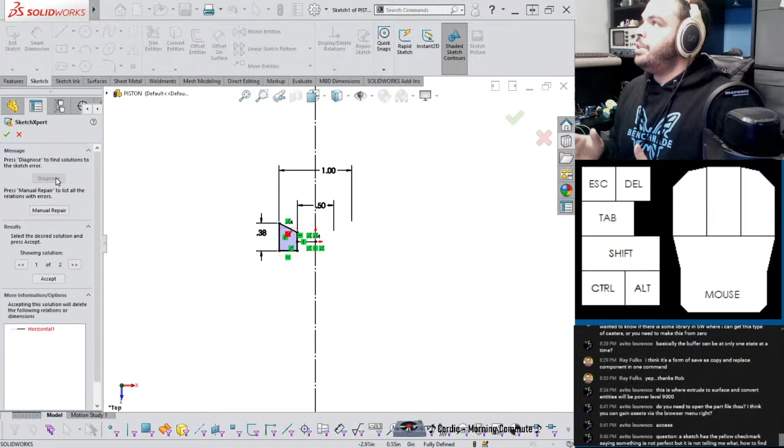But what about larger sketches? Well here's what you can do. So you can see it in my stream, all the way at the bottom here it says no solution found. You click on that, and that brings you to your SketchXpert. So a single click on no solution found will bring you there. So at this point you can actually say diagnose, and it will figure out what relations or dimensions can be cut out to make the sketch happy again.

So let's see the first solution it found. It says, hey, if you just get rid of this horizontal, the sketch works again, because this is coincident with this, kind of extends the line out. That's not what I want, so I can just hit this next button to see my other solution. And now it correctly found that, oh, this coincident, if you get rid of it, everything works again. And I guess you have to hit accept, but then you can find it in that way, saying it's not overdefined, neither does it have conflicting dimensions.

My yellow check mark is only visible in the browser. Interesting, I think that's a more complicated question then, and that's something I might have to actually see the example for. Where I would start is, right click, what's wrong? Well, it also says here, what's wrong? And then once I have this message, I could properly advise you. But yeah, I think it would still be, if you haven't seen the SketchXpert, that should definitely help you out.

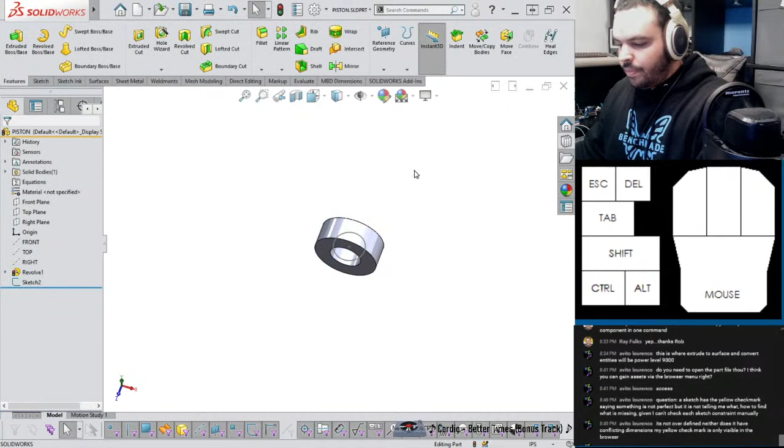Get a ring, and we've got to draw a stem, right? Okay, point. Oh, I goofed up, I made this too small. Yeah, because I want to use up to next, but it only works if it's completely bounded by the solid. I don't know how long this has to be, so I'm just going to guess 12. Up to next.

Oh yeah, sometimes up to next and up to surface can give you different things if there's like two solutions. So if I do up to surface and pick this, okay, it gives the same thing, but sometimes it'll do something silly like go up to surface over here. Just wanted to see if that would happen with this.

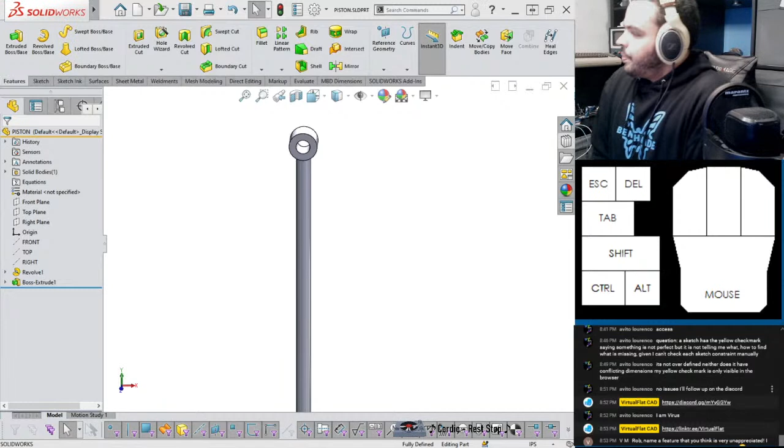Rob, name a feature you think is very unappreciated. I recently looked for opportunities to use Jogline, it's awesome. I might be cheating on this, I'll be honest, but here, let me - there's one that I think needs to really get some love.

I've got to set it up first. Let me get rid of this hole. So let's pretend I modeled this hole with a regular boss extrude, and I wanted to model the pin on the inside, like this. So I'll go ahead, model a pin, might even just leave it like this. Mid-plane, 3 inches, sure why not. Uncheck merge result because I want the pin to be separate.

So you have a situation like this, and you'll say, oh, I want a hole that perfectly fits this. You could use extruded cut or something like that, but the indent command is probably my favorite underdog feature. It doesn't get used a lot, but I use it a ton now that I know its full potential.

So why isn't it used that much? Well, in its regular form it works a little bit silly. Indent kind of turns things into sheet metal parts. So if I hit OK to this and I section this, you see it kind of combines this, like it's almost like an aluminum drawing, almost like a can that goes around this thing.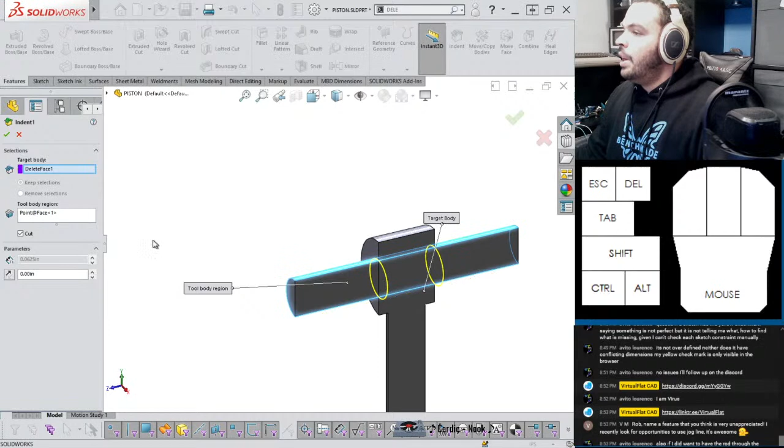So it's kind of weird, why would you ever use this? Very rare case. But if you change it to cut, then it becomes the greatest thing since sliced bread. Cut indent means that basically where this thing is crossing through any solids, it cuts out a perfect hole for it that will update with changes pretty much. So if I change this to 0.0625, hit rebuild, it changes the shape.

You might be saying, well, I can do that with the cut extrude, just reuse the sketch, right? But it does it with the body. So you could have like a mold of a plastic part, and with this you can change the entire part around and the entire mold will change. That's probably one of my favorite features.

Also, if I want to have the rod through the ring, how would I do that? Two-side extrude. Oh, are you talking about a mid-plane? So normally it comes out the one end because it's just blind, like this. But if you put it to mid-plane, it basically splits the difference and puts one on each side. Let me know if that's what you were asking there.

Just kind of like that. Or of course you could go blind on one end, direction to blind on the other end. And then if you needed something like 1 inch on one side and 3 inches on the other side, there's plenty of ways you could do that.

Alright, so going back to our... Cool, generate the negative mold real time. Yeah, right on, that's one of the methods you can do that. There are even more optimized mold tool stuff, like for closing off holes and stuff like that.

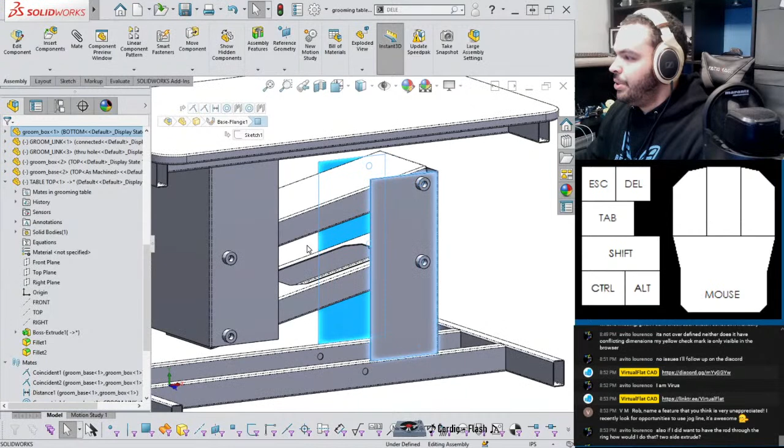It's wild, so that's a deep rabbit hole. I'm telling you, you could do this for years, you could do this stuff for years and just never get to the bottom of modeling in SolidWorks.

Actuator, let's put that, so this with that, and then front plane of that with front plane of this, so that should have that in there. And then lastly, I want this.

I was talking about the vertical rod where you face some difficulty with the up-to-surface issue. Oh, so I would probably use the starting plane condition. So instead of starting from the sketch plane, you can start from an offset, or if you make a plane before, you can pick that plane and then go mid-plane from there, or something like that.

What about a stream using the Surface Module? Yeah, of course. Honestly, I'm feeling very comfortable with these streams right now. Oh, I goofed up, I didn't want this last one. Yeah, I'm feeling very comfortable with these streams.

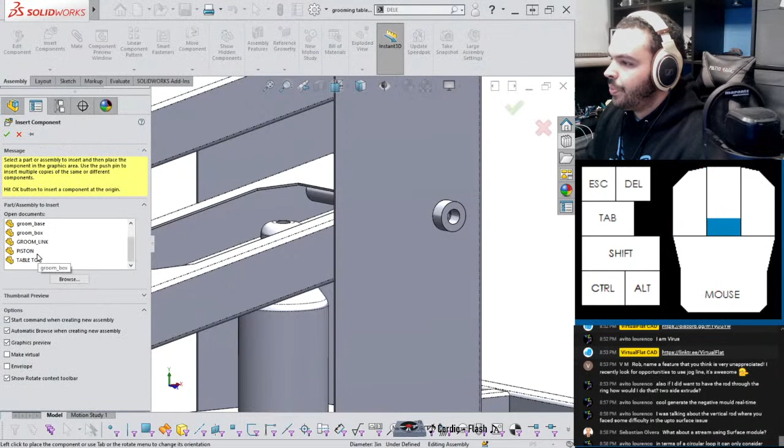So there'll be plenty of more of these to come. Piston. So there, and then this, this should move it into place. Concentric. So I do that.

Yeah, what's interesting is... okay, I realized something. In real life, the actuator doesn't move like that, it doesn't wiggle back and forth. But it needs a degree of freedom because the point where it's attaching to is moving in this arc. That is what this hole is for. So I need this whole thing to pivot.

Okay, let's make some edits, and then we're pretty much home free. Before I do that, so that stays, that stays, that stays, this dies - and by dies I mean turned off. So front, so

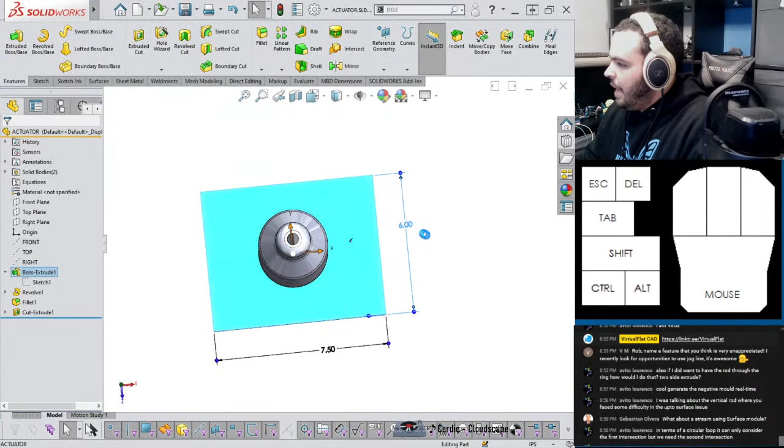Go ahead and change this to not be equal anymore. And I'll change that to 7. So it's going to be slightly rectangular. Nope, needs to be shorter than that. 6. Shorter still. This is actually the use case for top-down assembly modeling, to prevent potato stuff like this. But it's all cool.

Or actually, screw it, get rid of it. Let's model something else, like this. Let's model like a tab.

Okay, 0.5. Centered about here, stretching out about 1 inch, like that. And that needs to be like that.

So in terms of a circular loop, I can only consider the first intersection, but we need the second intersection. I might have to try that again later to see exactly what you're referring to.

Although you're coming near to 507, what's next? There's a lot of 507 left, so there's going to be that, but if I model everything from 507, I'm just going to keep looking around and see stuff around my house, or do research on different amazing mechanisms that people use and start modeling those.

So hold up, add a higher pair between the actuator stroke and the horizontal support above. Just a dome on the stroke and then a tangent mate will do it. Yeah, I could do it that way, but I think this way we'll actually use the actual pivot, which I think is what it actually does.

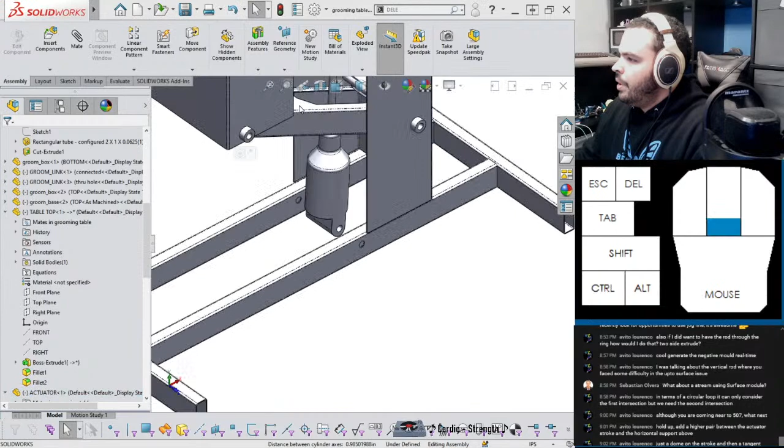And I'm just going to delete the face of this fillet. Okay. So now I can put this here and here. That locks into place, and there we go. So now the actuator has a rotational degree of freedom that allows it to actually go through with its stroke.

Yeah, I didn't model any pins, but I think that's going to be trivial. So I'd say let's save, because a lot of times when SOLIDWORKS crashes is when I'm putting appearances on for some reason. So saving is good.

Paint, some black spray paint. Control Shift C copies appearance, and I want to paste. And it's going to paint these all black, and then the top can be wood. Just make it look like something. There we go. Oops. Save.

And then I think like a dark wood, just like the real life one. Organic wood. Is that the end grain? Yeah, I put the end grain like a dingus. There we go.

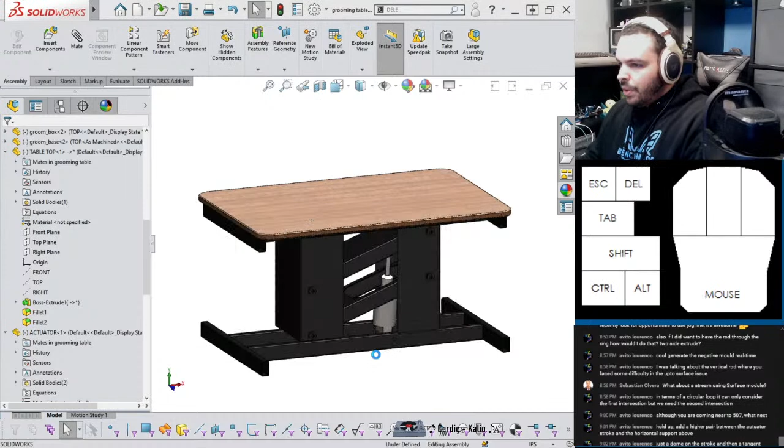But I think I'll bring things to the middle and go to my motion study. And this should be pretty trivial because it's just putting a motor on that actuator, and this whole thing should run, hopefully. So motor, linear.

So here's the important bit. Motor location along this axis going the other way. And here's the important bit. Recall that as it goes through its motion, the actuator is doing this, right?

So in order to prevent it from locking up, because I can't just say go perfectly straight up, it needs to be just going out of the actuator body, no matter what orientation that it is. So that's what this box is for. So I select the actuator body with this, so it knows that it is measuring that direction with respect to the orientation of this body.

And then I think I might just put data points. Let's do displacement.

And let's do Akima spline. Let's get some of these up and we'll start filling it. So 1 to 10. I think 12 is going to be far too much. So it starts at 0, then goes to 12, and then back down. Well, actually, I don't have to do that since it loops. Can I select multiple rows? I have too many rows. Delete. Delete. Delete.

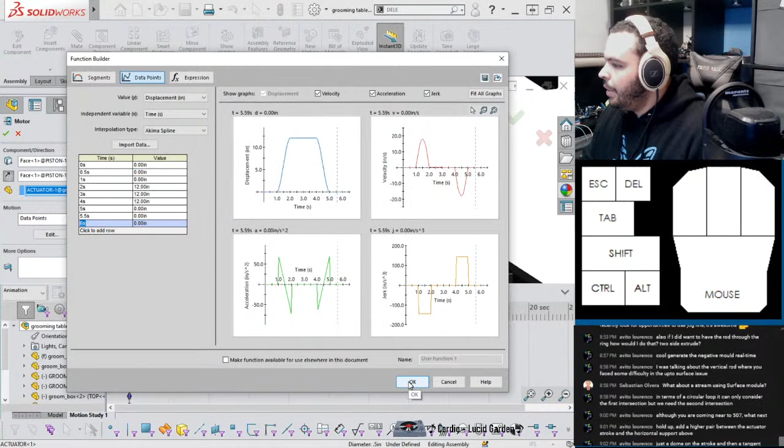Let's make that... so from 0 to just to the end of 2. Yeah, let's see. Well, I actually do. I'm changing my mind. Because, and this is just a quirk of Camtasia, the video editing software I use, it doesn't know how to reverse video, which is a potato. Well, let's do that. Oh, I knew it, way too much. It works though, it works. Yeah, the way it's acting right now, it's more like a puppy catapult than a grooming table. So we'll fix that here.

Avito asking, hey, are you familiar with inbuilt SOLIDWORKS Cam, or do you use third-party stuff like Mastercam?

I actually started learning SOLIDWORKS Cam, but I don't think I know it well enough to teach it on stream. So I don't think I can be a resource for that package. Yeah, it comes free with SOLIDWORKS 2018 Plus, I think, if you're on subscription, so that's a caveat.

Oh yeah, click speed, yeah, I can do that, but a stroke is just way too much. Cut that by two-thirds. There we go. That's a saner number, and I need to actually see what's going on. Replace. I think that's pretty good.

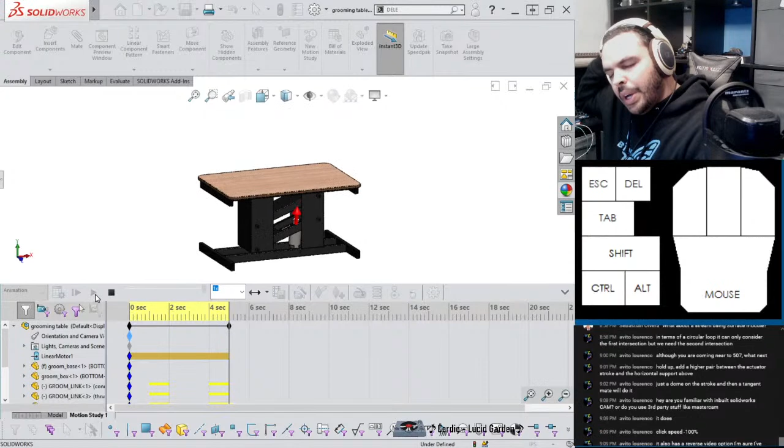Also, within SOLIDWORKS, yeah, there is this thing, reciprocate. But a quirk of it is I've never been able to save video with that setting. So even if I put reciprocate, it's only for this viewer. If I hit save video, it only puts the frames in order. Yeah, and if Camtasia was able to just reverse the video, I would have done that. But yeah, there is a reciprocate and loop option and stuff like that. But for some reason, when you go to save it, there's no options here, like save it as reciprocate or anything like that. I think that's the main issue.

So let's first bump the frame rate on this puppy to 60. Okay, the ding of happiness. And I'm going to get rid of these phantom edges, so display tangent edges removed. So we'll have something like this.

Oh, even... okay, so that's news to me. Keep in mind, I do have an old version of Camtasia, Camtasia 2018. When I was looking for it, I searched it up, and basically there was a forum saying oh, it's not here. But I could be wrong, and I'll probably look into that again, because if what you're saying is true, that will save me a lot of pain in the future. Most of the time it's not too bad to just have SOLIDWORKS do the reciprocating for you, but sometimes it really is a pain.

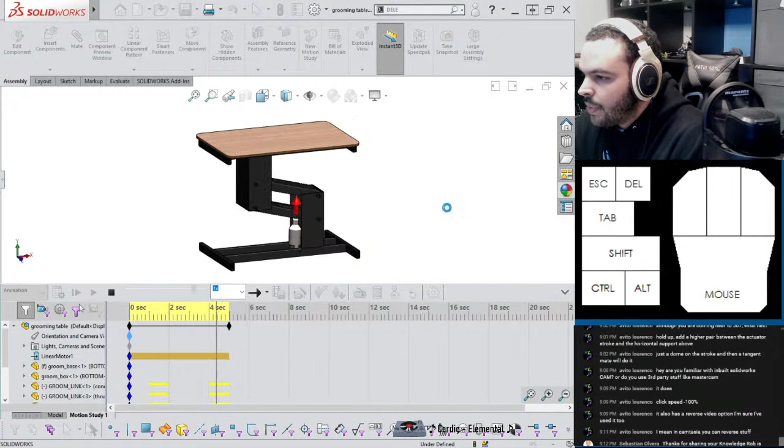Oh, see you, Sebastian, so glad you tuned in. The stream's probably coming to an end here as soon as I review the footage. So thanks for sticking with me this whole time, pleasure to have you.

And so let us go to Window, open up this folder, and take a look. Open with Windows Media Player. I'd say that's a winner. I really like the way that came out, so I think I'm going to work with this. It is a little off to the left a bit, but that can easily be fixed in Camtasia.